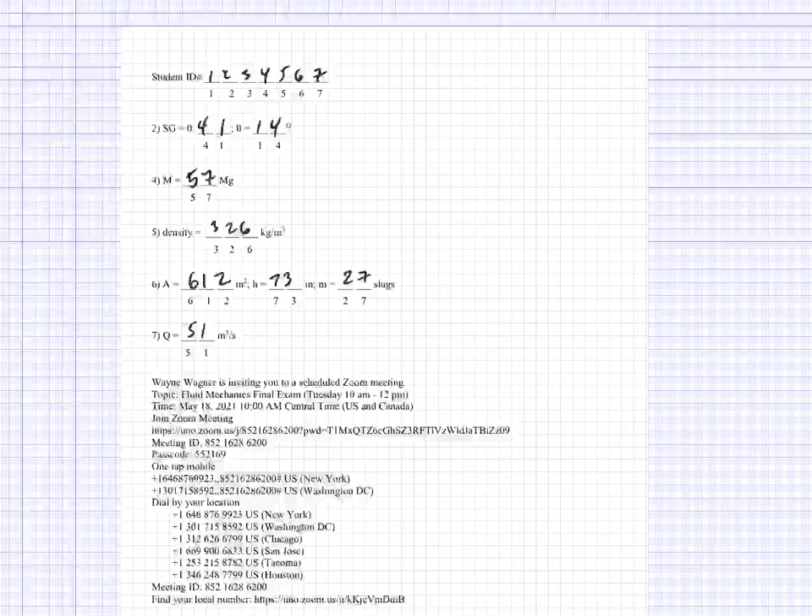All right, so it's been a little while since I worked this exam, since this is now basically summer of 2021. But I'm working this older one, hopefully to help you guys out. This is the final from fall or spring or something. Let's see, when is this? Spring 2021, anyway, was when we took this. Although I think down here it says fall 2020. It looks like I goofed and forgot to write that on there.

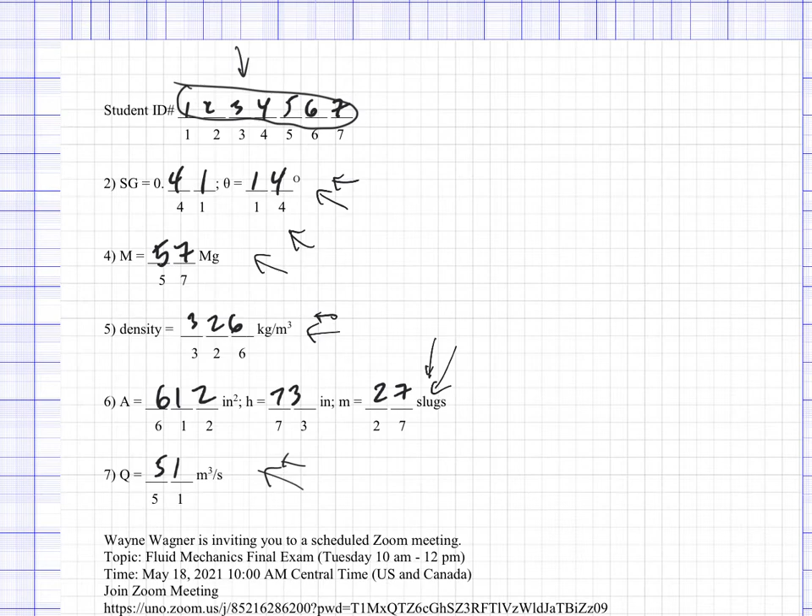Okay, and this first page you can basically ignore. This was just so that everybody could write in their student number right here, and they would get different numbers for each of these questions. It was to prevent cheating. So what I've done here is I've just entered in the student ID number 1, 2, 3, 4, 5, 6, 7, and I'm just going to enter all these numbers in the blanks in each problem. This didn't really stop cheating, but hopefully it made it a little more difficult. So I've already taken all these numbers and written them on the problems, and so when we get there, we will have numbers.

All right, so let's go down here. Here's the first page. Indicate whether the following statements are best described as true or false. Number 1, turbulent flow is more chaotic than laminar flow. That's true. That's almost like the definition of turbulent flow. Number 2, or B or whatever, EGL never decreases in the direction of the fluid flow. This is very false. It's pretty much always decreasing in the direction of the fluid flow. The only time it would increase is if there's a pump.

Okay. Fluid exiting the system into the atmosphere experiences zero gauge pressure at that point. That is true because zero gauge pressure is atmospheric pressure. So that's a good one. Okay. In the English system of units, power is measured in foot-pounds. Okay, that's actually work. But the way you can do this if you forgot is you can look at your sheet where they've got an equation for power, and it's gamma HP or HT, depending on if it's a pump or a turbine, times Q.

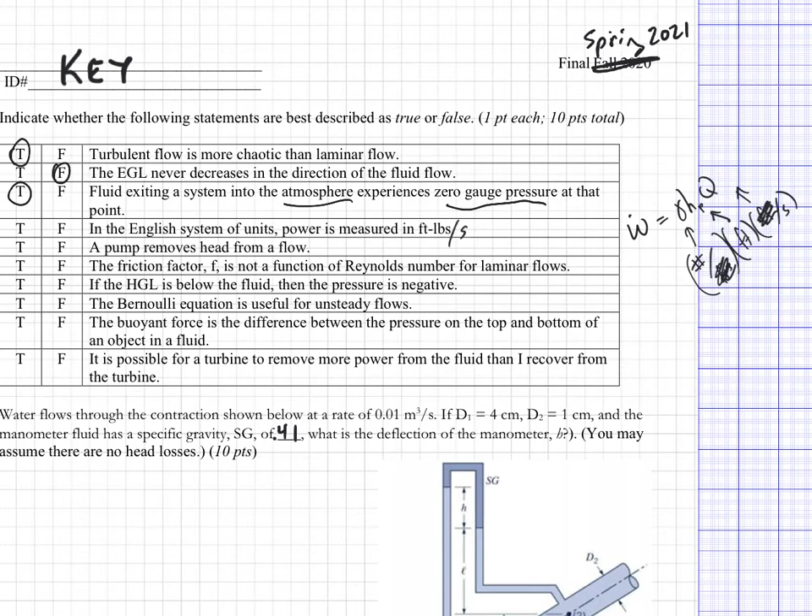And you can say, well, what is gamma? Well, gamma is pounds per foot cubed. The HP, the head from the pump, well, that's just feet. And then Q is cubic feet per second, right? So then you can say, oh, these cubic feet cancel with those cubic feet, and I'm left with foot-pounds per second. So this would be true if that was foot-pounds per second, but it doesn't have that, so it's false. Okay, a pump removes head from a flow. Well, that's exactly the opposite of what it does.

The friction factor F is not a function of Reynolds number for laminar flows. Remember for laminar flow, there's an equation, F for laminar flows, that's 64 over RE. So that very specifically says that friction factor for laminar flows is a function of the Reynolds number. So this is definitely false.

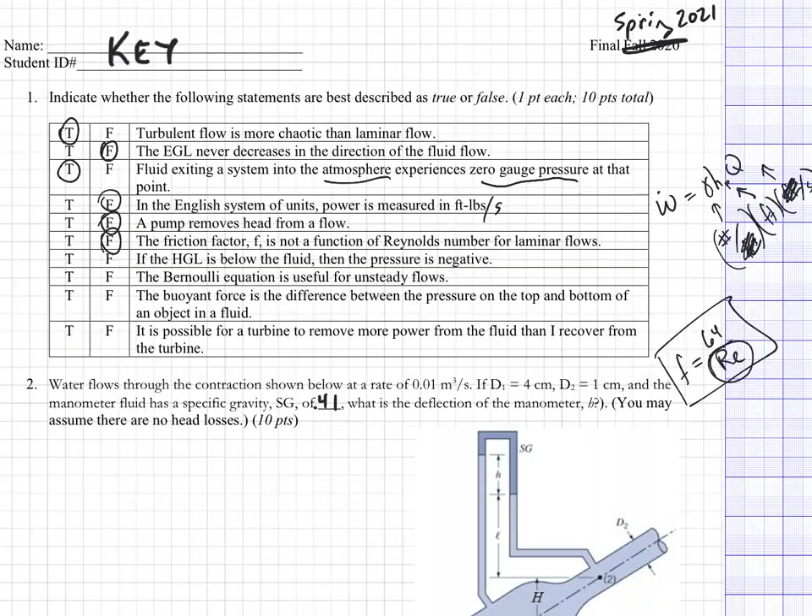Okay, if the HGL is below the fluid, then the pressure is negative. Now this is a little bit complicated, but it is true. Let's say I had a pipe, and I've got an HGL and it's dropping and it drops below the fluid itself. Okay, so this is the HGL. Remember usually you would say, okay, well, here's some datum. And then from here to the fluid itself, that's Z, and then from there up to there, that's P on gamma.

And so Z, P on gamma, and then all of a sudden here, Z, and then P on gamma comes back down. So that is the equivalent of a negative P on gamma, which means we have a negative pressure, in terms of gauge anyway. So if the HGL is below the fluid, then the pressure is negative. This is true, in terms of gauge. So that's definitely a true. This probably could have been a little clearer, I guess.

The Bernoulli equation is useful for unsteady flows. This is false. One of the assumptions of the Bernoulli equation is that it is steady. So that's just something you have to know. The buoyant force is the difference between the pressure on the top and bottom of an object in a fluid. That is true. That is really the definition of the buoyant force.

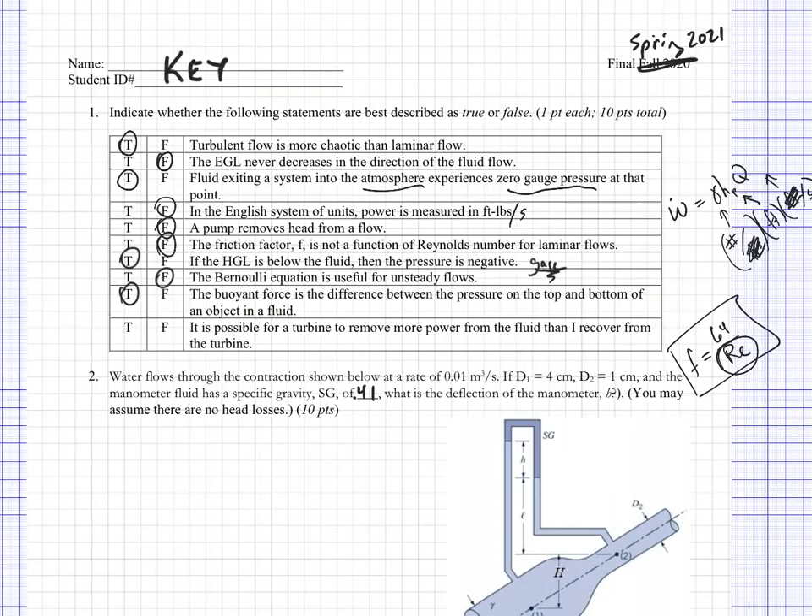And the last one: it is possible for a turbine to remove more power from the fluid than I recover from the turbine. Okay, so let's imagine what this is. So I've got a fluid, it's cruising along, I put in a turbine. Right, so if I remove, say, 100 kilowatts from the fluid. So the fluid here has 1,000 kilowatts, and then right here it's got 900 kilowatts because the turbine removed 100.

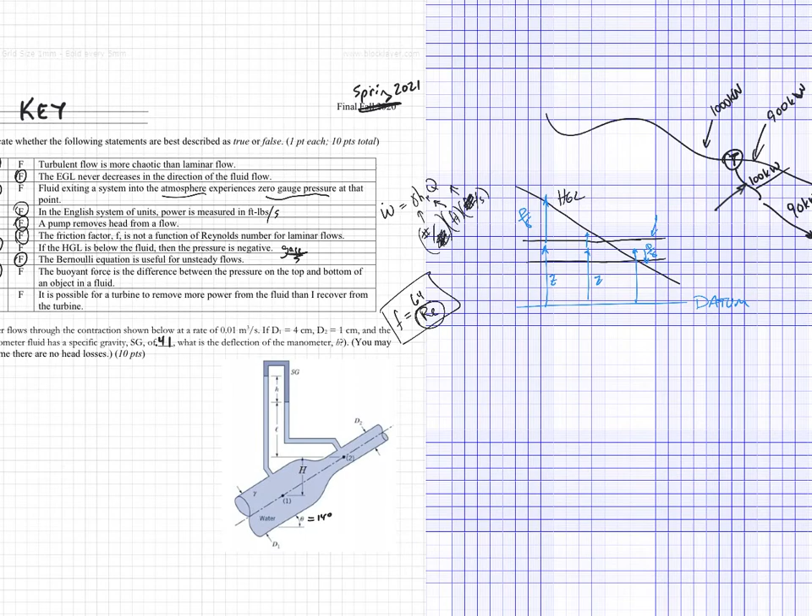Well, how many of those do I actually get? Well, I'm going to lose some because of just efficiency, right? The turbine's not 100% efficient, so I maybe only get 90 kilowatts. Okay, so let's see here. It is possible for the turbine to remove more power from the fluid than I recover from the turbine. Okay, so that is definitely true. That is the way the world works. Laws of thermodynamics.

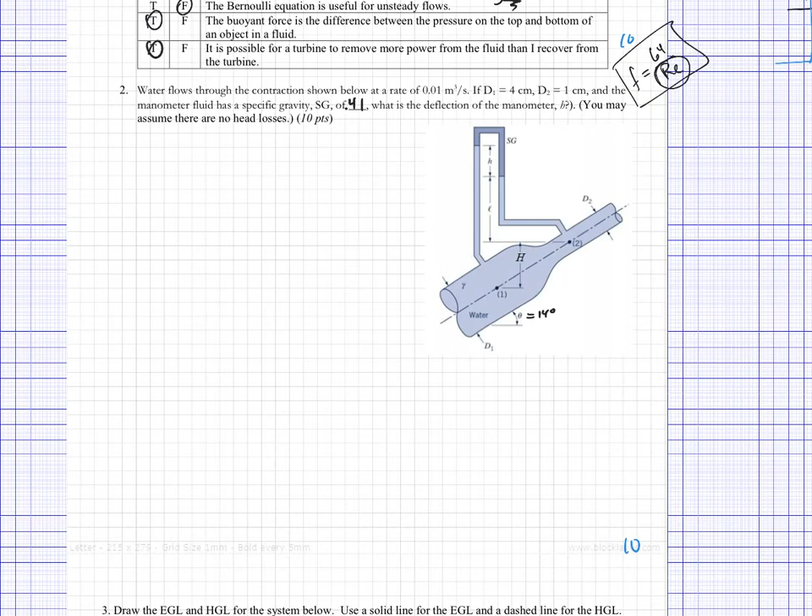Anyway, so that problem's worth 10. Obviously, that math there is easy. Well, almost all of them are worth 10 points. I like easy math. Okay, let's see. So number 2, we have one of these. You guys know me. You know that this is my favorite type because it basically brings in everything.

Okay, water flows through the contraction shown at Q of this number. If D1 is 4 and D2 is 1, and the manometer fluid has a specific gravity of 0.41. Okay, so that depended on the student's student number, so everybody would have had a different number right there. So we'll go with 0.41. What is the deflection of the manometer, h? Okay, so this right here is what we're looking for. You may assume there's no head losses.

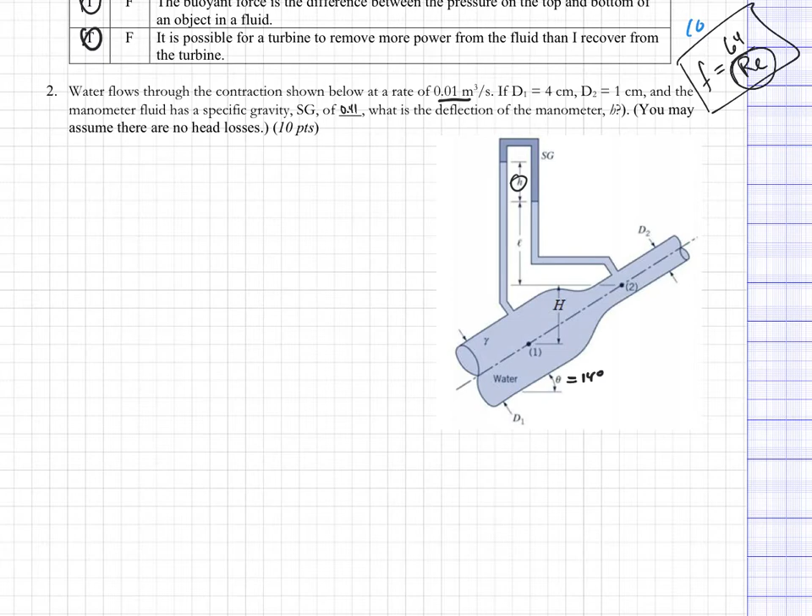So when we assume there's no head losses and there's no pumps or turbines, basically they're saying you can use Bernoulli. The only problem with that, I guess, is that you might be concerned about not having that alpha, which could come into play. But not really, because we're on a streamline. It is steady, so it meets all the criteria of Bernoulli. So we're just going to go from 1 to 2 on Bernoulli. Okay, so here's Bernoulli, and Bernoulli, usually in these problems, is the master equation. So I'm going to put it up here as the master, fully aware that we're usually going to do the same things over and over again for these.

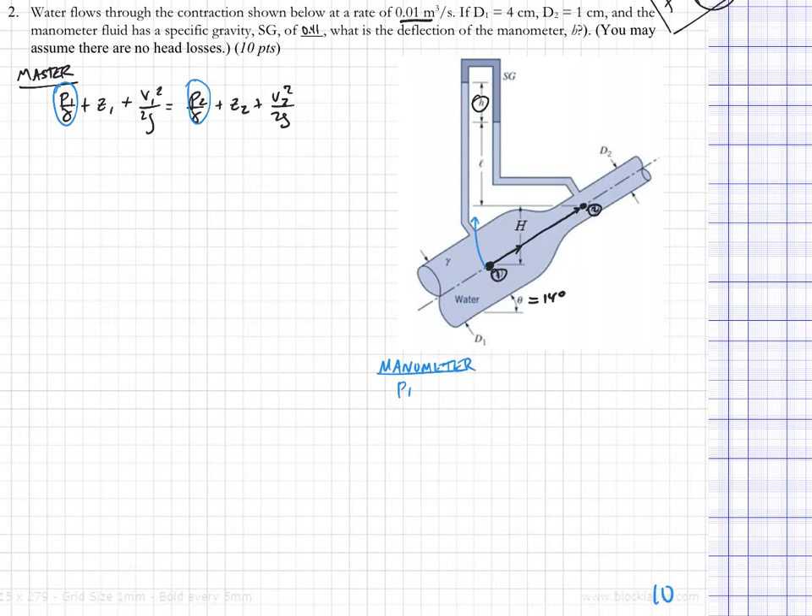So, we've got a manometer. So here's point 1, and here's point 2. And we've got a manometer, and so we're gonna walk from point 1 to point 2. Okay, so I'll start at pressure at 1. So this is the manometer. And why am I doing that? Because I got to get at these pressures, right? So that's the first step. Okay, so P1. I'm gonna go up, so go minus gamma of whatever this thing is that's flowing through here. What is flowing through here? Water. Okay. Gamma water times capital H.

And then I'm going to keep going up, plus L. And then I'm going to keep going up plus lowercase h. Right? And then from here I'm going to move laterally in that fluid, so I'm not going to worry about that. And then I'm going to move down in whatever this is. So I'm going to go plus gamma of the manometer fluid, gamma fluid, times that distance, which is lowercase h. And then I'm going to go down in water, that L, minus gamma water times this L. And that's going to get me over to this point right here, equals P2.

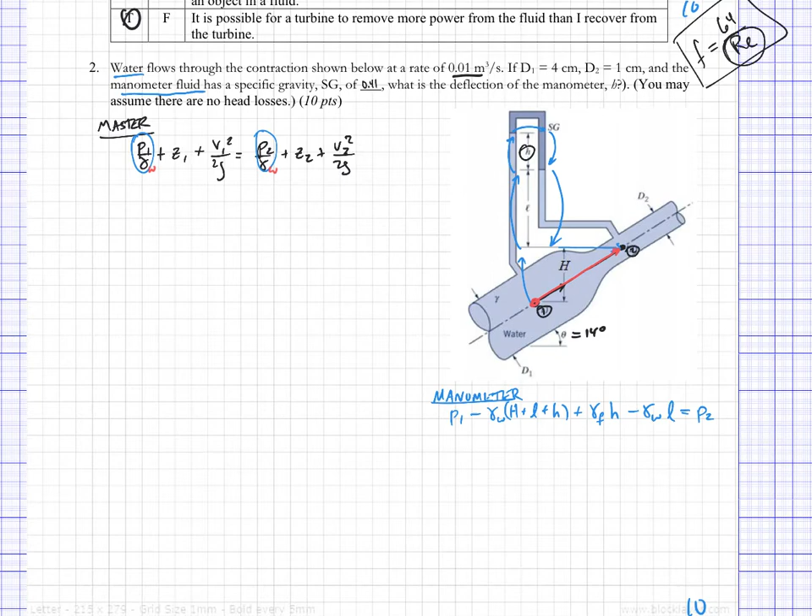Okay, so once we've done that, the manometer equation, we're going to have to rearrange this, right? And in this equation, we always want to be careful and remember that this is gamma water, and that's gamma water, because water is the fluid that is flowing from 1 to 2 in the Bernoulli equation. So we need to remember that when I rearrange this by subtracting P1 from both sides, I want to then divide it by the gamma of water and not by the gamma of this other fluid.

So let's see here. All right, so we're going to divide by the gamma of water. Gamma water, gamma water, gamma water, gamma water. As I do that division, these two gamma waters are going to cancel. These two gamma waters are going to cancel. I've got a minus L right here, because remember that it's going to have that negative sign on it.

Wait a second. Oh, there's an error here, isn't there? This last bit should have been a plus gamma, shouldn't it? So that should be a plus sign. Okay, but anyway, so I've got a minus L right here and I've got a plus L right here. So those two are going to cancel.

So what I'm left with here is, if you do all the algebra, negative h minus h plus gamma f h over gamma water. And in place of that gamma f, I'm going to put SF gamma water, because gamma f equals SF gamma water from the definition of the specific gravity. This L went away with that L, so these two L's cancel. Equals P2 minus P1 over gamma water. And then these two are going to cancel out.

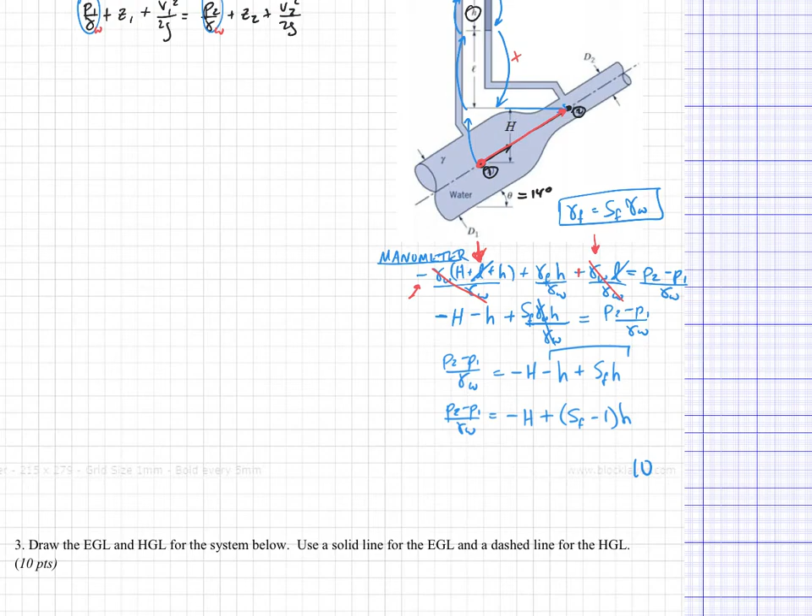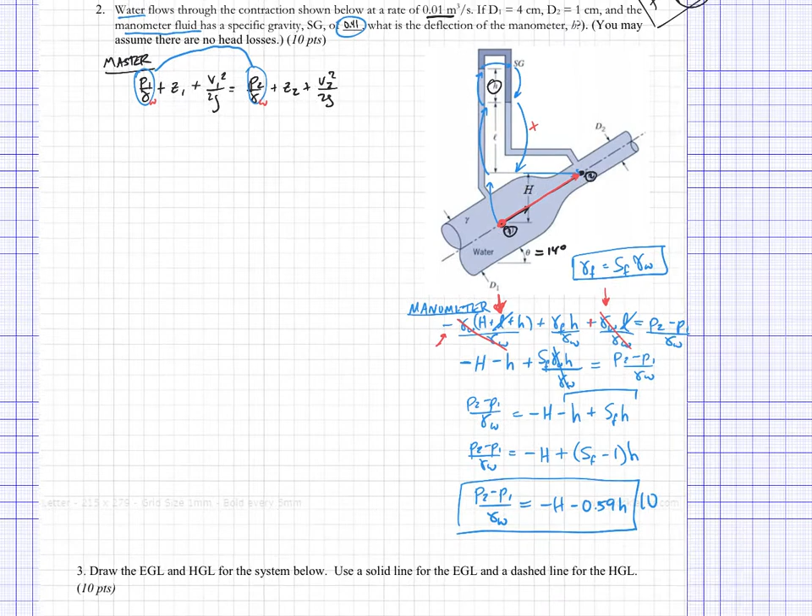The last thing we would do is this specific gravity is 0.41, so we would plug that in, just because it makes it easier. You don't have to do it at this point. Negative H plus, so 0.41 minus 1 is going to be minus 0.59 lowercase h. So once we have that, now I know P2 and P1, or at least how they compare to each other. Of course, it introduces two unknowns, this capital H and this lowercase h. So we'll have to deal with that shortly.

Okay, so now let's go on to the z's. We've got these two right here. We're going to look at our diagram and note that Z1 is right here, and Z2 is right here. So the difference between them is H. So if I make this the datum, then Z2 is at a height of z equals H. So Z2 becomes capital H, and Z1 is the datum.

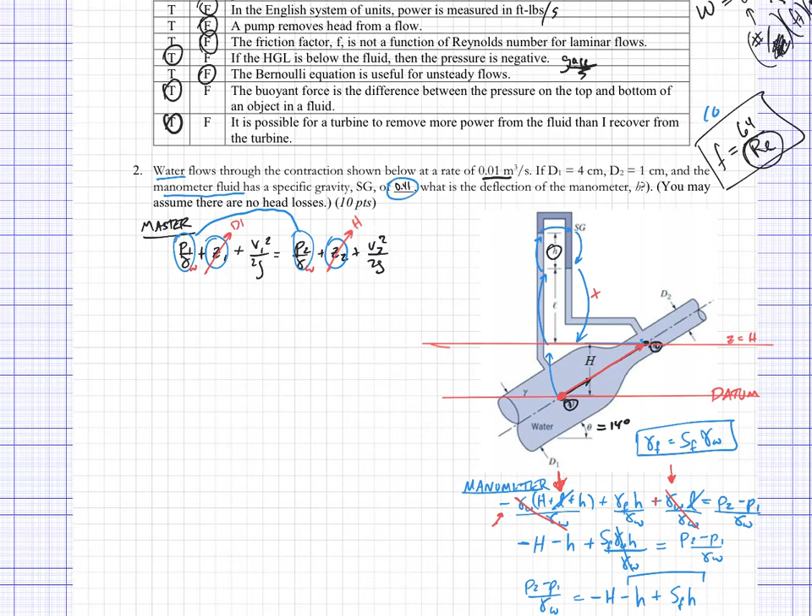Then the last bit, we've got to get at V1 and V2. Usually the way we get at those, and this isn't going to be any different, is we're going to use continuity. Maybe I'm going to do that over here, because we've got D1 and D2. So from continuity, Q at 1 equals Q at 2. So V1A1 equals V2A2. And you should already know that V2 is going to be 16 times V1, but we'll go ahead and work that out.

So V1 times pi D1 squared over 4 equals V2 times pi D2 squared over 4. These pi's and 4's are going to go away. And I'm going to say that V2 equals V1 times D1 squared over D2 squared.

D1 squared over D2 squared times V1. That's just some algebraic manipulation. If you plug in 4 and square it, and plug in 1 and square it, you're going to get a ratio of 16. So V2 equals 16 V1.

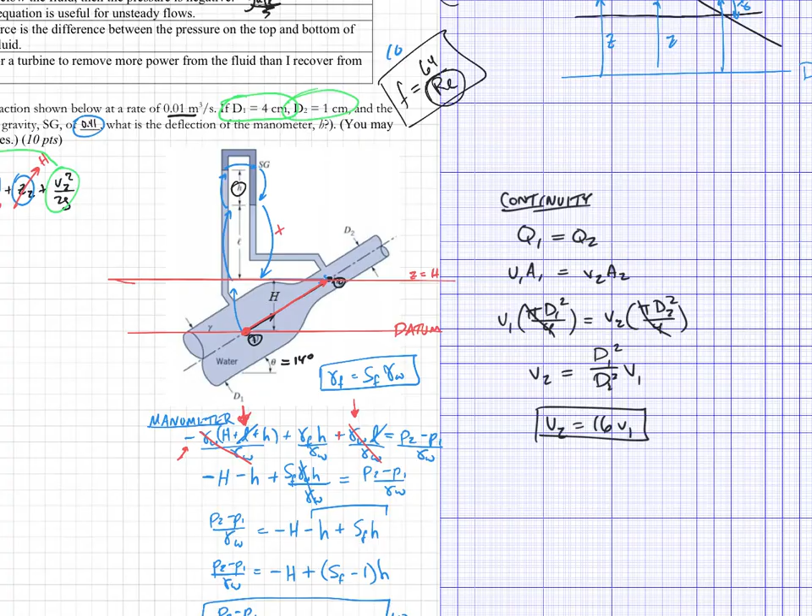Which really means for the Bernoulli or energy equation, whichever one you choose to use, V1 doesn't really matter. That's just the way it is. But we're going to go over here and make use of that knowledge in this equation.

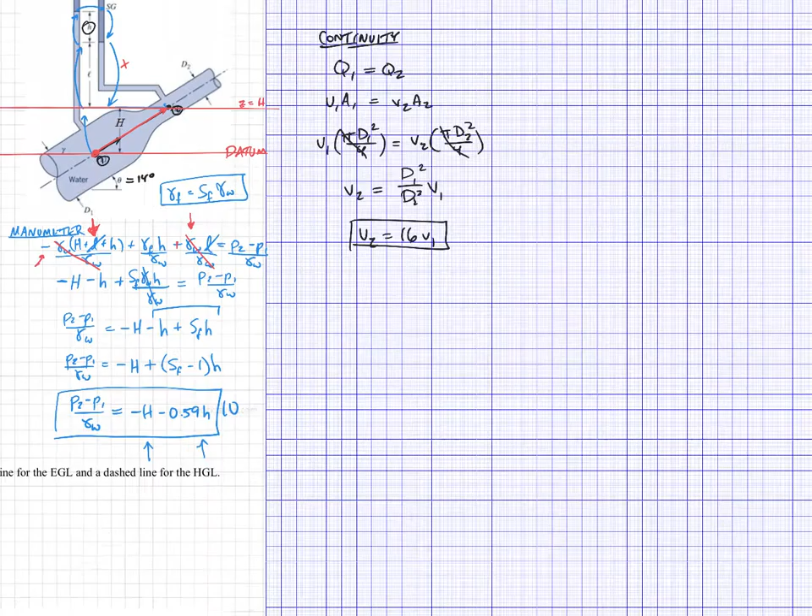Okay, so let's go ahead and plug all of this in and see what happens. Wait, actually, I really screwed that up, didn't I? We've got a flow rate, we've got Q. So that's messed up. Let's go ahead and do this one more time. Since I know Q is...

0.01 cubic meters per second, so I could say Q equals V1A1. So 0.01 meters cubed per second equals V1 times pi times D1 squared—D1 was 4 centimeters, 0.04 meters squared, divided by 4. So V1 is pretty high, really.

7.9577 meters per second, awfully high, right? And if we multiply that by 16 using this relationship, V2 is 127.32 meters per second. So you can see this one's 16 times as big. When we square these, because they plug into the Bernoulli equation, this one's going to be 16 squared times as big. I think it was 16 squared, 256.

I think that's right. So you can see this one basically just doesn't matter. We could ignore it in the whole equation and it would make no difference. But whatever, okay. So we're going to go back over here, and now we have everything we need to plug into this equation. So the first thing I want to do is rearrange it a little bit.

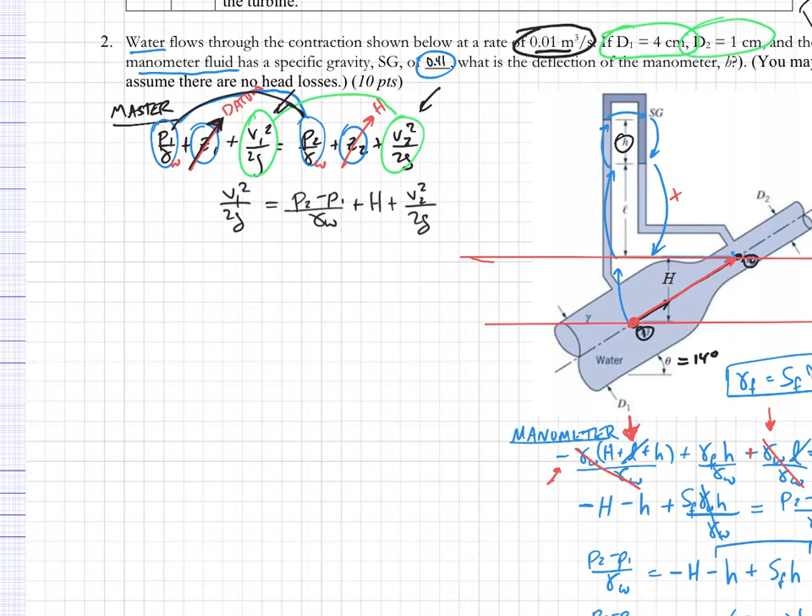From that, I think we are like 100% ready to plug in. So let's do, let's see, V1 was this number, 7.9577 meters per second squared divided by 2 times 9.81 meters per second squared equals P2 minus P1, which is this number right here. Ignore this—that's the number of points on this question.

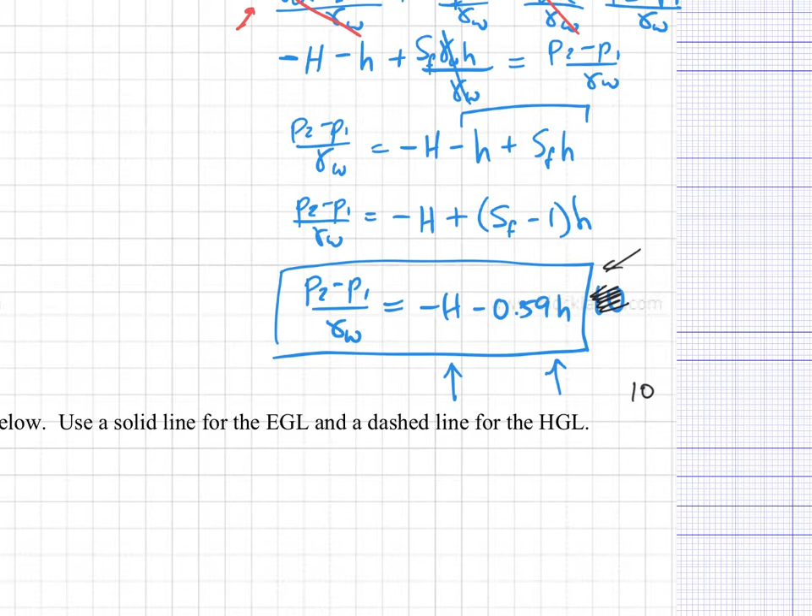Negative H minus 0.59H. So negative H minus 0.59 lowercase h. H is just a capital H. Notice these two cancel—that always happens. It's a really nice feature of these things.

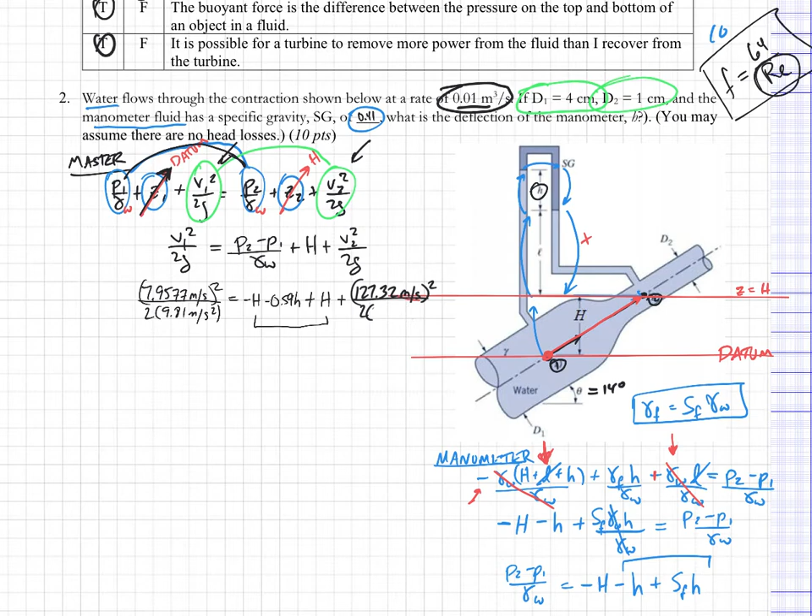And then we'll go plus, and we've got V2, and V2 is some big number, 127.32 meters per second squared over 2 times... 32.2 feet—no, 9.81, excuse me. I wish I could say I did that on purpose to show you that everybody makes those mistakes, but I didn't. All right, so then we just have to solve this for H, right?

I'm going to go ahead and put in the intermediate steps here. So these H's are going to cancel, just because it's going to help me make sure I don't make an error. So negative 0.59H plus, and I've got a number on each side of this thing. And here you can see kind of what I was driving at a second ago—this velocity head is 256 times as big as this velocity head. So when you start squaring things, it starts to really become nonlinear. A lot of times this is what happens.

So now we'll bring this over to the other side, and then we'll divide by negative 0.59, and we'll get some number—that will be our answer. Okay, so I'm getting 1,394.9 meters, or H equals 1.39 kilometers.

Now you may be saying to yourself, wait a second, that's totally unreasonable, therefore I should throw this problem away, blah blah blah. This is one of the problems of this exam—by giving everybody a different specific gravity here, it creates huge problems, or by giving them their own numbers. And so for a lot of this test, the answers just aren't going to make any reasonable sense. This is, in fact, the correct answer.

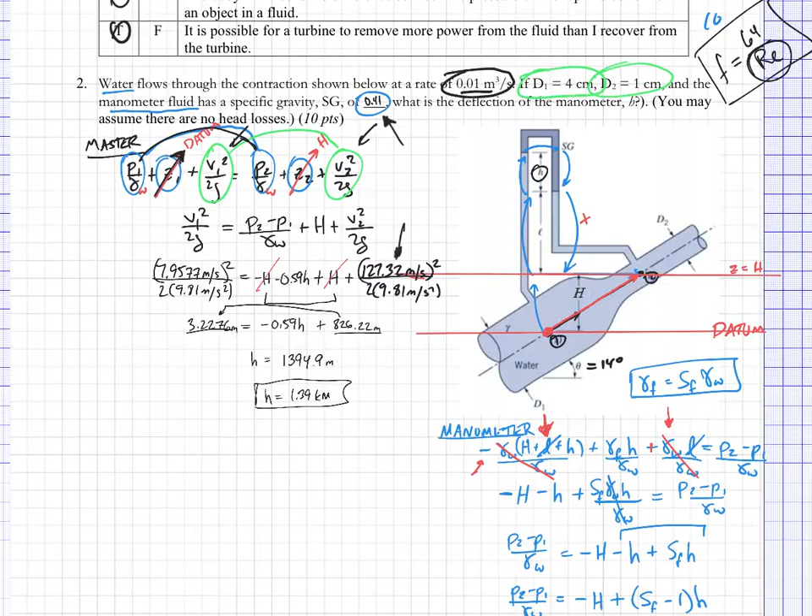Okay, so hopefully that's okay with you guys, but that's how we would work this problem. One last thing to note: this 14 degrees right here is a red herring. It was not necessary to know that. It's not important, the fluid doesn't care about the angle.

Okay, draw the EGL and HGL for the system below. Use a solid line for the EGL and a dashed line for the HGL. So let's see, solid line, maybe we'll go red for energy. So this will be EGL.

Remember, I like to think about the EGL first. 100%, let's think about the EGL, and let's only think about the EGL. Right along here, we have an elevation, which is coming from some datum, Z. My pressure head is 0, my velocity head is 0, right?

I get to this point, and here's where I'm going to lose energy. I'm going to lose energy here, here, here, and with the turbine. I wouldn't worry so much about the nozzle - I mean, technically you will lose energy in the nozzle, so let's just say you're going to lose energy in the nozzle.

You will gain energy in the pump, right? So this is a plus. All those other ones are minuses, right? And everywhere else we're going to lose energy, and we're going to lose energy at varying rates, right?

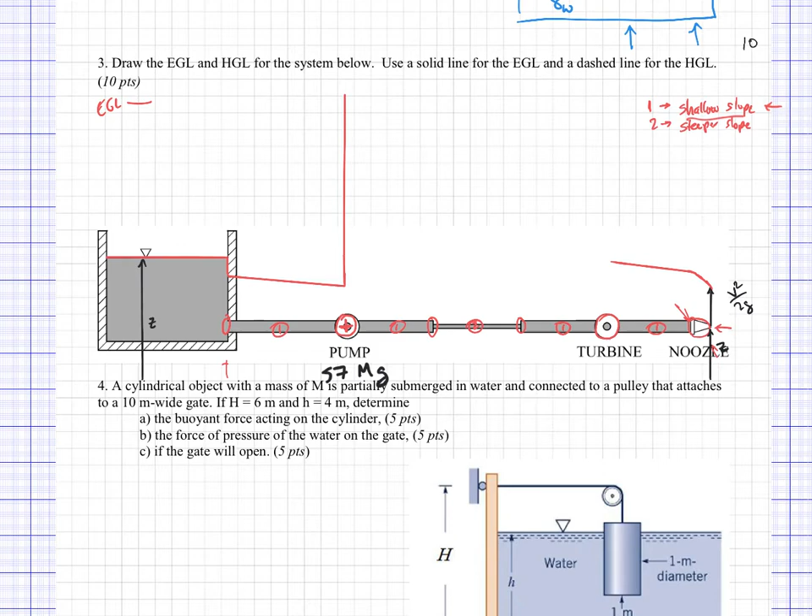Remember, I hit the turbine, I'm going to lose some energy, something significant. I don't know how much. Obviously, this is totally qualitative, so it could be a little tiny drop. I just need to see that there's a drop. And then we're coming out the other side. We're still in a kind of...

D1 pipe, a diameter of 1. So we're going to come back. We're going to hit this little knob or whatever here. I guess I should somehow demonstrate that I'm at these locations, so it never hurts, stuff like that.

Okay, now in here, it's that narrow pipe, so we're going to lose energy. Oh, okay, sorry, first I need a little head loss right there. So I want to kind of get the steepness here, right, and so we're going to go fairly steep in here.

And it looks like I'm going to end up working well into the space for the other problem. I apologize for that - this is, of course, why we drew it. So there's a little head loss right here, associated with this transition. And then we're going to have kind of like a little shallow - we're back in a diameter of 1 pipe, right? So there you go.

There's our HGL, or our EGL, right? And I'm going to kind of make these dotted so that it's clear that's not the same line. Okay, so that's our energy grade line.

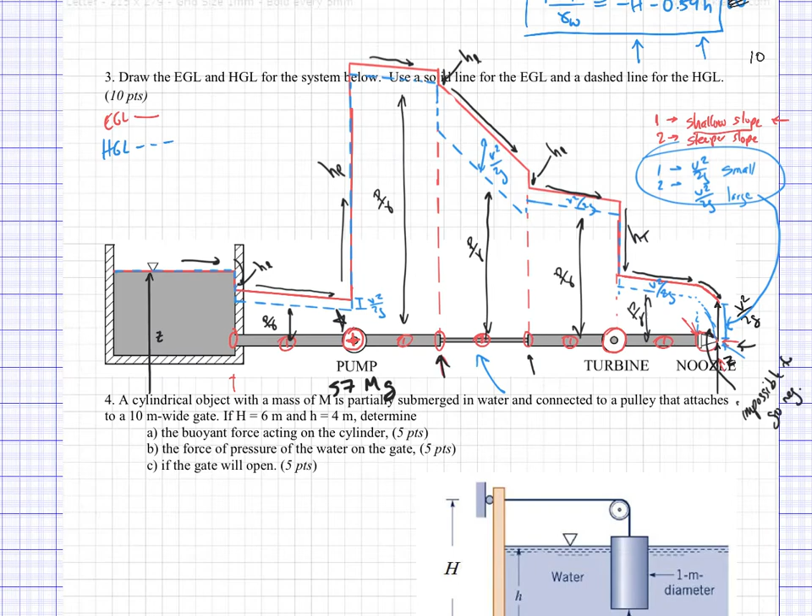I would expect that. I guess if you guys put that it was right here, I guess that's possible. But this is really the only spot in the system where you could expect a negative pressure might happen. And you might draw it that way, right? You might draw a steeper energy loss than I do, right? This is all qualitative, so who knows what would happen, right?

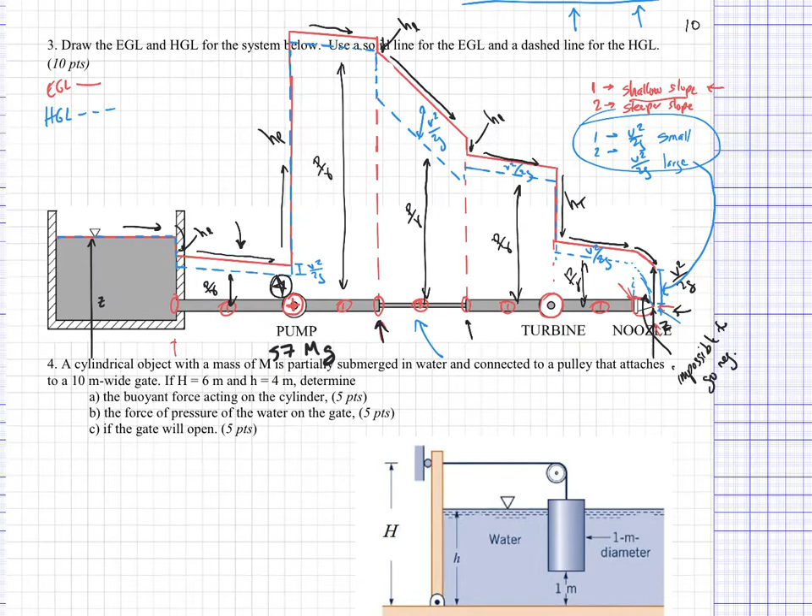So anyway, we're going to move on to the next one. That one's worth 10 points. The way that I grade these is I'm looking for, did you include all these little things like this and this. Not necessarily that you labeled them, but that the pipe went up and down in the places it's supposed to go.

Up and down, and then the slopes of these lines, and then this V squared on 2G. I want you to get those sizes approximately correct. Okay, so that's really the way I grade it.

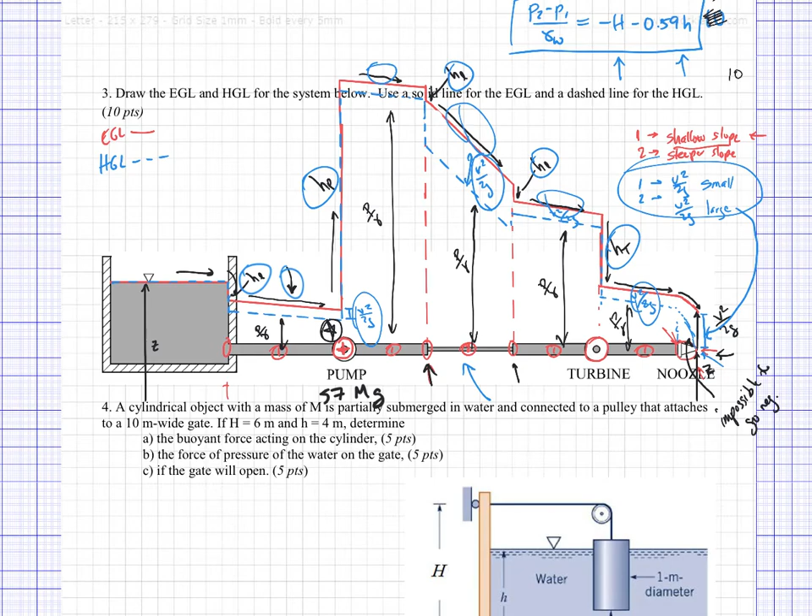If the only thing—what I call a major error—is if you have the EGL go up when there's not a pump, that is what I call a major error, and I'll take off 4 out of the 10 for something like that. Usually if somebody does that, there's going to be a lot more problems than just that, but it kind of means you don't really understand what you're doing with this particular problem. So just be very aware of that.

Okay, so a cylindrical object with a mass of m. So this mass right here is 57 megagrams. Okay, that's a really annoying unit.

So this is coming from somebody's student ID number, and we're going to turn that into a weight. Remember, weight equals mass times gravity. So we've got 57 megagrams, which is 57,000 kilograms, times gravity, which is 9.81 meters per second squared. So that weight equals 559.170 kilonewtons, or newtons, but I converted it into kilonewtons.

A cylindrical object with a mass of m is partially submerged in water and connected to a pulley that attaches to a 10-meter wide gate. If H, capital H, is 6 meters, and lowercase h is 4 meters, determine the buoyant force acting on the cylinder.

So we want the buoyant force acting on the cylinder, the force of pressure of the water on the gate, and whether the gate will open.

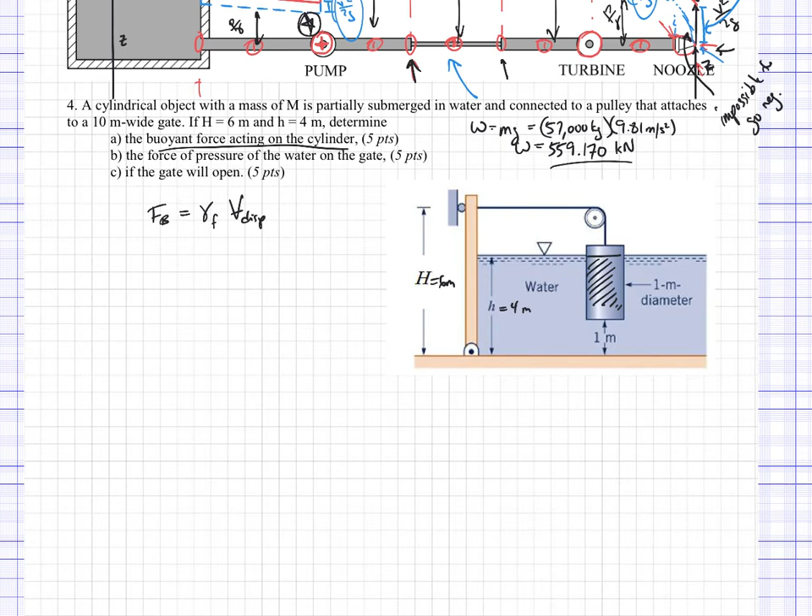I meant to draw those lines all the way down. So that has a height of 3 meters and a diameter of 1 meter. The force of buoyancy equals the gamma of the water times the volume displaced, which is the volume of the cylinder: pi r squared, the area of the bottom, times the depth, which is 3 meters, the height of this cylinder.

So FB equals gamma water—we're in meters, so that's 9810 newtons per meter cubed—times pi times the radius. It's a 1 meter diameter, so that's 0.5 meters squared, times the height, which is 3 meters.

FB equals, this is part A, so we're getting 23,114 newtons. This buoyant force is rather insignificant compared to the weight, since this is a very dense material.

So part B: what's the force of pressure of the water on the gate? We're looking for something totally different now. I'm going to box this so it reminds me not to erase it as I work through this problem. The water is right here, and this is the pressure prism. I need to know the force of pressure on that gate—how do we get that?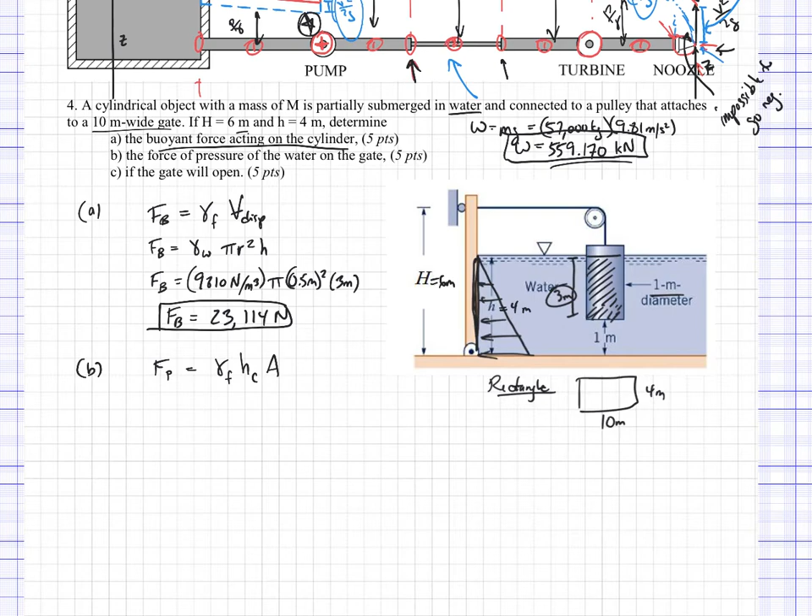I'm going to get all the things for it because the centroid is right here. The HC and the YC are both the same, because the HC goes from the water surface down to the centroid vertically, and the YC follows the surface of the gate down that same distance. Since the gate is vertical, it's the same for both: 2 meters and 2 meters. The area of this gate is 4 times 10.

So that's going to be 40 meters squared. And then the IXC for a rectangle is 1/12 the base, which is 10 meters, times the height, which is 4 meters, cubed. Okay, so that's some number, like 53.333 meters to the fourth. And as I've told you guys a million times before, I hate those units because it doesn't really mean a whole heck of a lot to me.

Okay, so anyway, let's go over here to the FP. Once we've done this, it's really just plug and chug for finding the force of pressure. So the force of pressure equals the gamma of the fluid, 9810 newtons per meter cubed. The HC is 2 meters, and the area is 40 meters squared. So the force of pressure is 784,800 newtons. Now you can see that number can maybe compete. They're of the same order of magnitude, more or less, right?

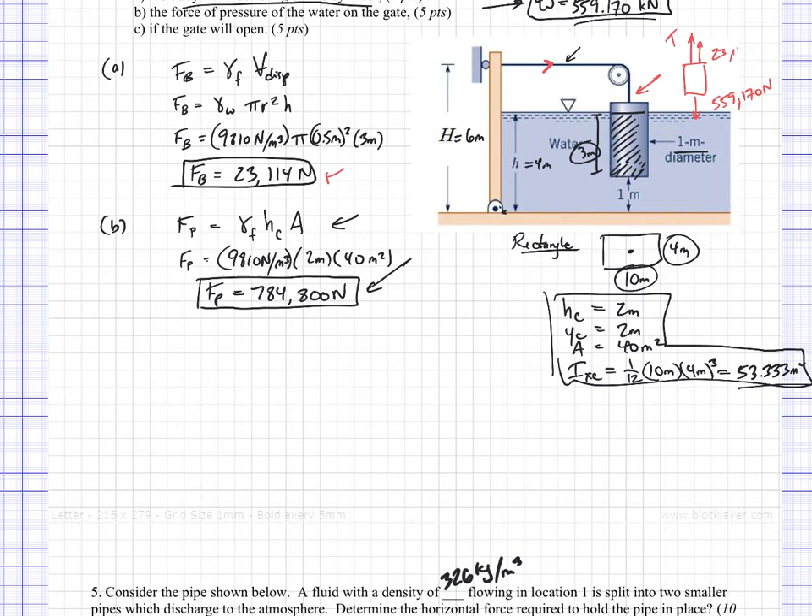If we really wanted to analyze it, we would look at this weight, because the weight has a weight going down of 559,170 newtons, and presumably it's got a tension going this way, and a buoyant force of 23,114 newtons. So if this thing is not moving, which is the assumption we're going to make, because the last thing is if the gate will open, we're going to assume that it's not going to open.

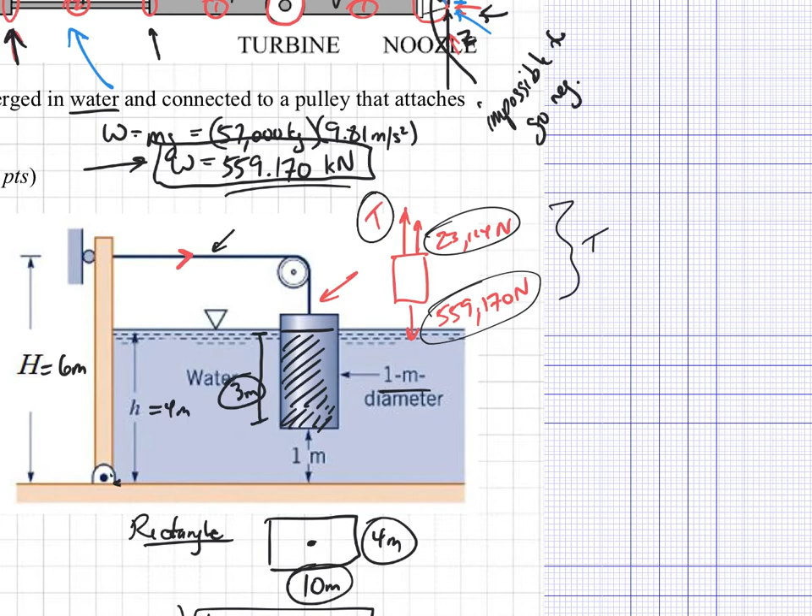Based on this, my free body diagram of that weight: I've got a tension and a buoyant force going up, and the weight of the thing going down. So tension has to be greater than or equal to the difference of those two for this thing to not move. Well, really it's got to be equal to, right? Equals for no motion. So let's do that subtraction real quick: 559,170 minus 23,114.

And we're going to get 536,056 newtons. Right? It sucks working with these big numbers, excuse my French. So 536,056 newtons.

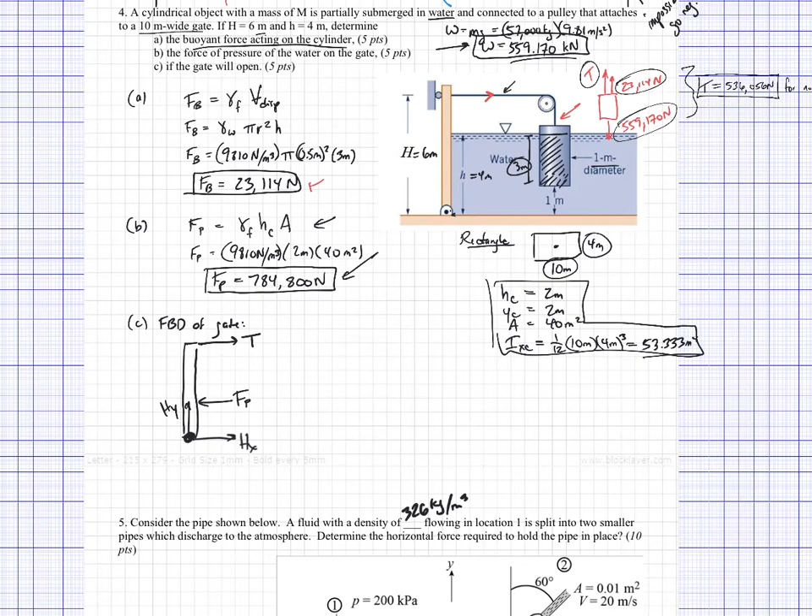So what that means is that I can go down here to C, and for that to be the case, let me draw the free body diagram of the gate. It looks like this, more or less, quick and dirty. Here's a hinge. At the hinge I've got HX and HY, and I've got a tension up here, which we know how big it needs to be, and then the force of the pressure. So to solve this, we're going to say the sum of the moments around H equals 0.

So I've got FP times this moment arm, which I don't know yet. We'll call that Y, times Y. That's causing it to spin this way, so that's positive, minus the tension times its moment arm, which is this whole distance here, which is given as 6 meters, equals 0. So that's this capital H. Maybe I'll leave it as capital H for cleanliness, since I don't have any of these other variables plugged in yet.

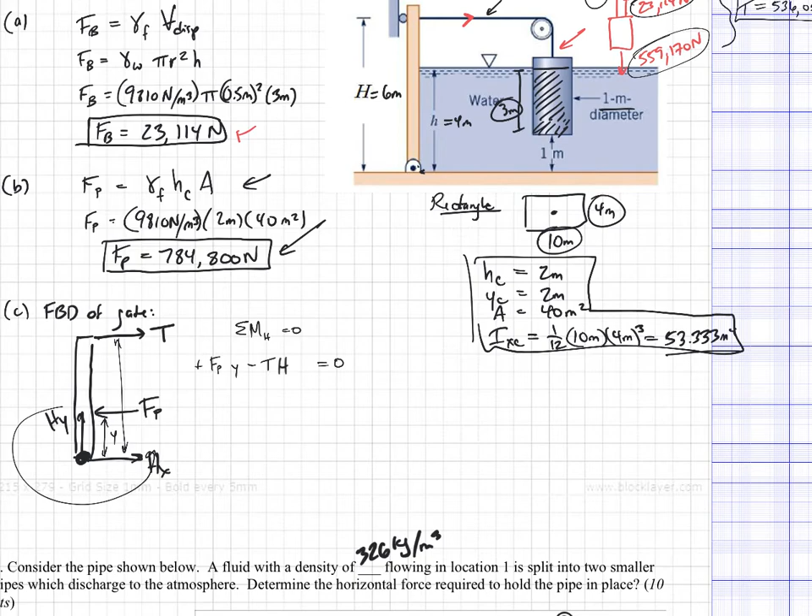So let's see. Come on, baby. You can do it. Okay, here's a capital H. All right, so this little y is what we need right here. We need the distance to that FP, right? So FP is like right here. And the way we get it is we need this distance right here, which is called YCP.

Okay? How do we get YCP? Right? This little distance right here, this is 4 meters minus YCP. Okay? And so that's really what we're looking for, is 4 minus YCP. But to get YCP, we use our equation YC plus IXC, or IXX or whatever, over YC A.

Okay, so YCP equals, let's see, YC is 2 meters plus IXC, which is this number, 53.333 meters to the fourth, divided by YC, which is 2 meters, divided by the area, which is 40 meters. Right, so YCP equals 2 2/3 essentially.

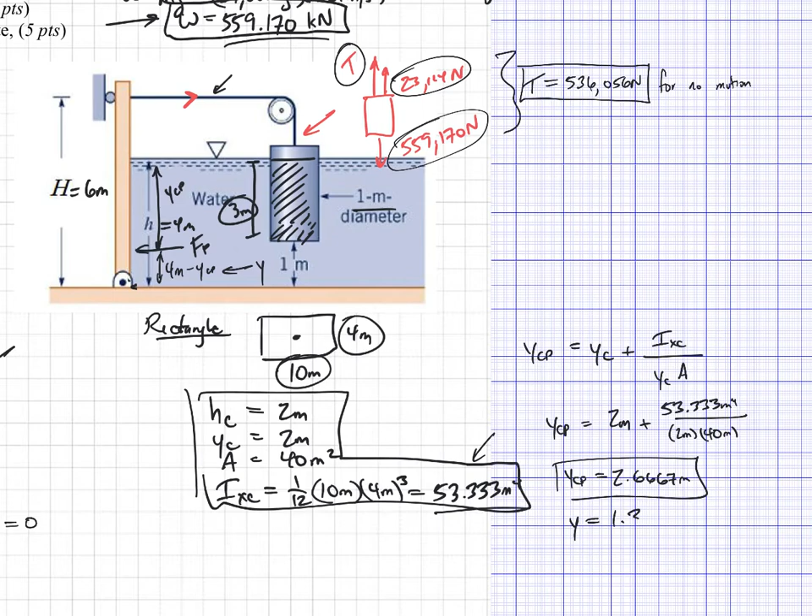Okay, which means this distance we're looking for right here, which I've called Y, Y is going to be 4 minus that, which is 1.3333 meters. Okay, so we'll go back over here, and so this is 1.3333 meters. This is 6 meters. Okay, and so we'll go ahead and plug in.

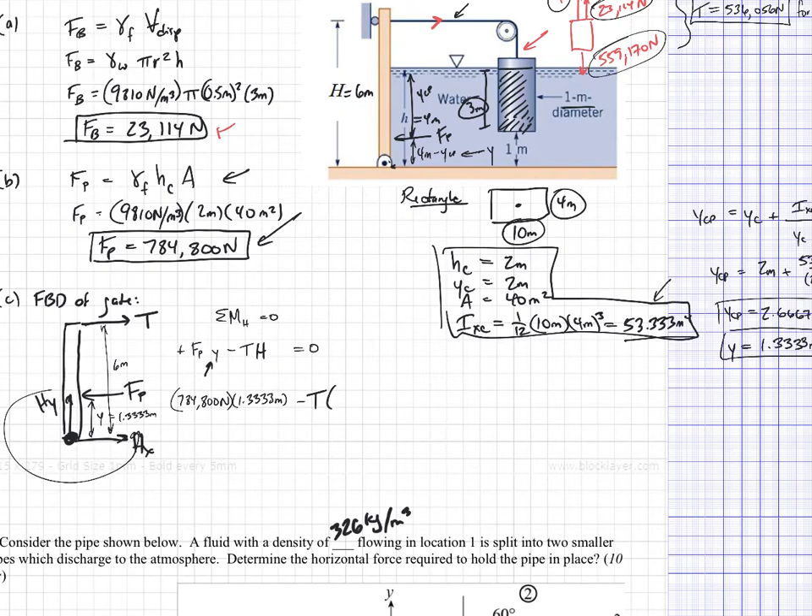So FP is 784,800 newtons times Y. What was Y? Oh, 1.3333 meters, minus the tension in the rope. Let's go ahead and solve for the tension in the rope times H, which is 6 meters, equals 0, right? I have a tension up here, but that's really a critical tension, right?

If the tension is greater than this number, then that means this fluid is going to go that way. I mean, the weight is going to rise. And if the tension is less than that number, then the thing will fall, right? Yeah, anyway. Let's go ahead and get a tension first, and then we'll think about this. So tension equals. Okay, so this is the tension.

This is the tension required to overcome the weight of the water, or the pressure of the water, to overcome FP. Right, so 174 kilonewtons. Okay, it turns out we've got this many kilonewtons, okay, which means the gate will open.

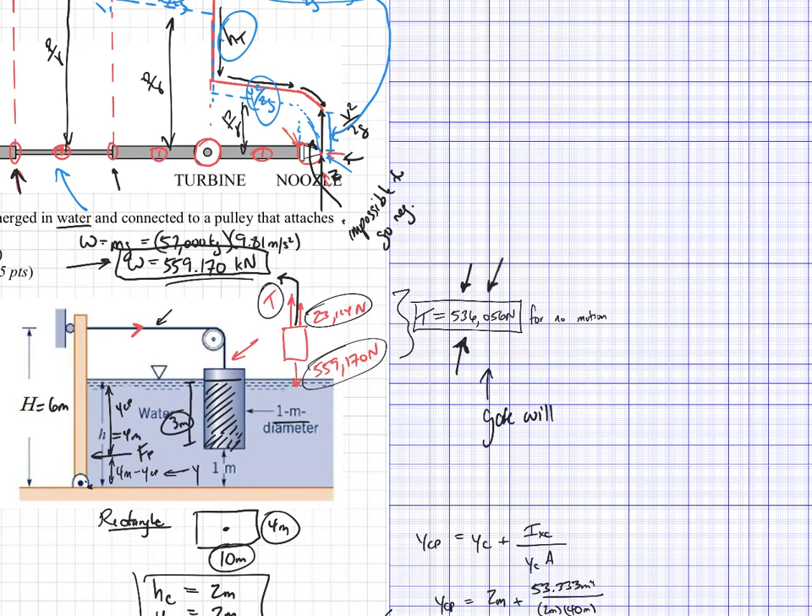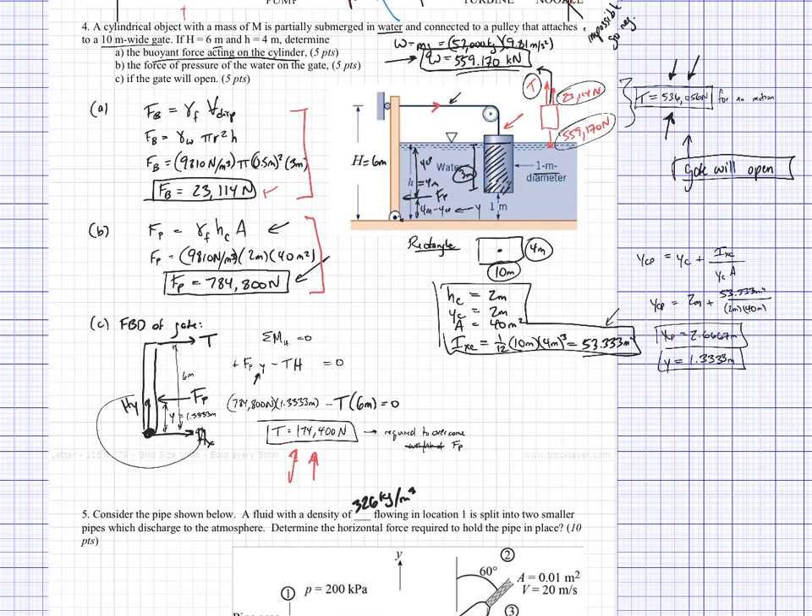Okay, all in all, this is one of the hardest problems I've ever put on a final. I mean, hard is a little bit strong, only because this part was straightforward, this part is straightforward, but this last little bit, just thinking about, well, what is this tension? And what is the actual tension on the rope? So this is the actual tension on the rope at the moment that this thing is this deep in, right?

Because as soon as it starts to move, if it moves in that direction, or if it moves in any direction, the buoyant force will change. But the buoyant force isn't terribly important here, right? Because it's relatively small. So anyway, this C part was a bit of a doozy. It kind of took some slowing down and thinking about it. So just be aware of that.

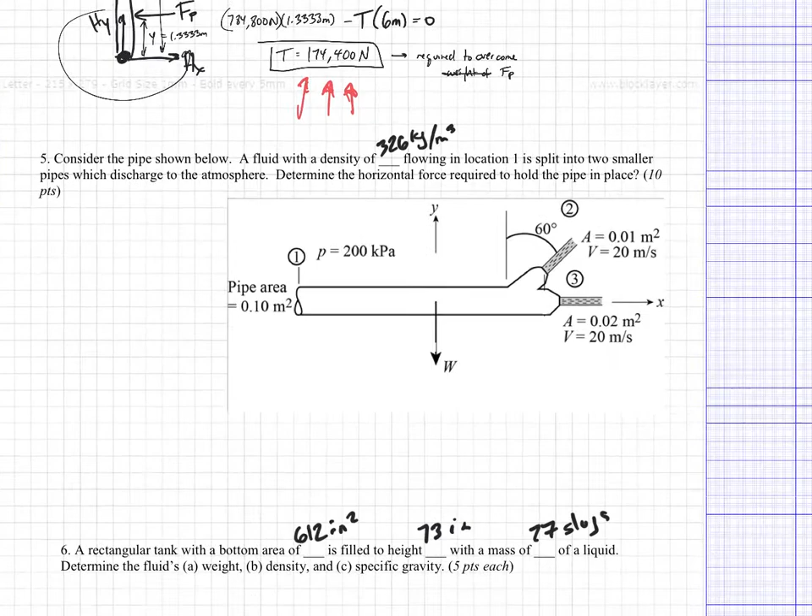All right. Consider the pipe shown below. I love it when they tell you to consider a pipe shown below. Okay, so we've got a fluid with some density flowing in location 1. It's split into 2 smaller pipes which discharge to the atmosphere. Okay, determine the horizontal force required to hold the pipe in place. Okay, so when we approach something like this, let's see, the horizontal force.

So we're doing a force on a moving fluid, which means we're going to be doing the momentum equation. And it only wants horizontal, so we're going to go in the x direction. So sum of F in the x plus the summation of the ins of rho Vx Q equals summation of the outs of rho Vx Q. Okay, notice for the ins, I've got 1 location, and for the outs, I've got 2 locations, right?

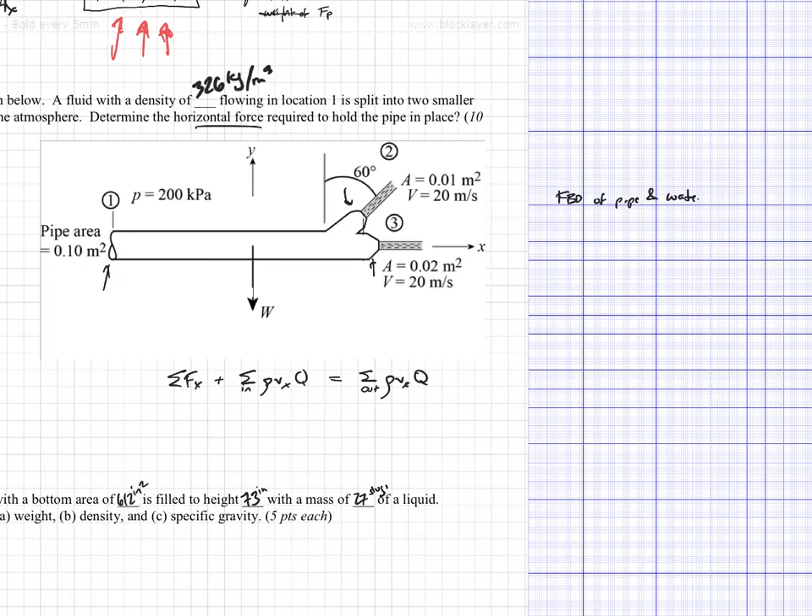So let's consider a little free body diagram over here of the pipe and water. Okay, why do I want the pipe? Because this is a question about holding the pipe in place. Okay, so here's my pipe. This one's closed. Those two are open to the atmosphere.

Okay, so I'm going to go in here and just draw on this, right? So this one's a pipe, so it's got a little pressure right there. So I'll call that P1A1. Okay, it's an enclosed pipe, so it's pressurized, right?

Otherwise, let's see here. I've got the weight of the water. I've got the weight of the pipe. Okay, luckily I don't have to worry about those, right? Those are going down, and this is a question in the X direction. And then I've got a force to anchor it. Force to anchor in the Y or Z direction, which, again, we're not going to worry about that. Force to anchor in the X direction, right?

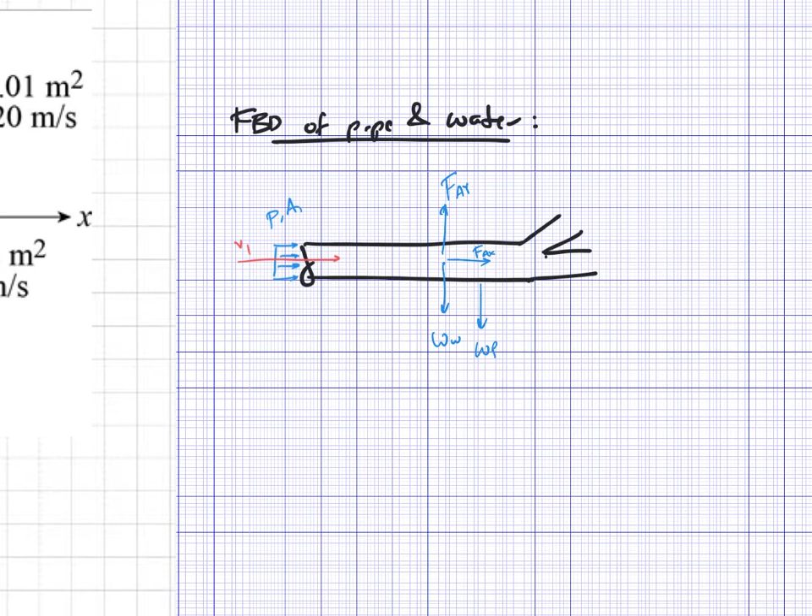Beautiful. All right, so then the only other things we need to deal with is we've got fluxes. So V1, V2, and V3. And remember, there's no pressure at 2 or 3 because it's going out into the atmosphere. Okay, so these are the things that we need to deal with. I'm going to expand this equation down here based on that free body diagram, and that will kind of tell me what it is that we need to solve for.

Okay, so the forces in the X direction. I've got FAX, that's what we're looking for. I've got plus P1A1. Okay, that's in the X direction. Those are all my forces. Okay, I've got an in right here of V1. So I'm going to go plus rho V1, okay, Q1, I guess, equals. Now we've got two outs here.

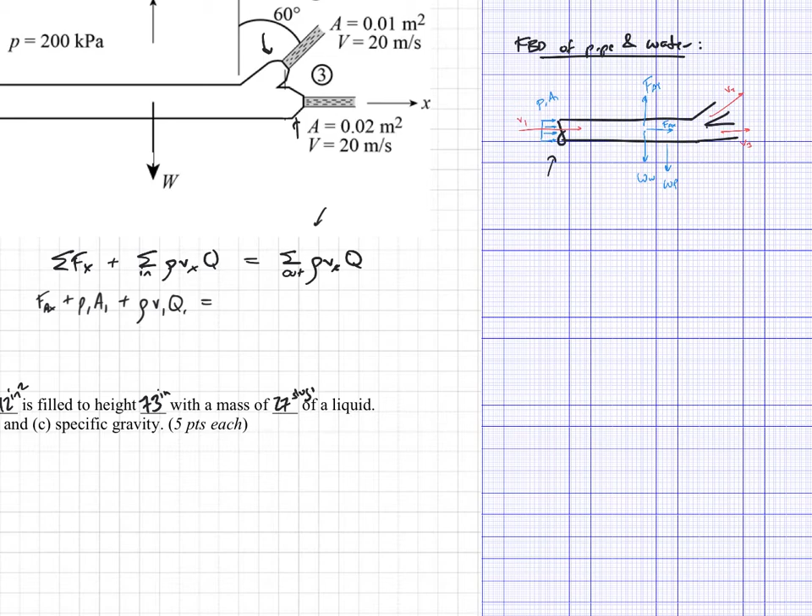So the first one is going to be, now remember we're only dealing with the X direction, so it's going to be rho. We'll call this V2, but we're only dealing with the X direction, so that's going to be the sine of 60 degrees based on this angle right here, because that's the opposite side, times Q2.

Okay, and that's in a positive X direction, so then I'm going to do rho V3, and that one's just in the straight direction, so we don't need an angle on there. We'll call that Q3. Okay. So that's pretty much the whole thing. Now we just need to see what it is that we don't know, right? So once we're here, let's see what we know and what we need, okay?

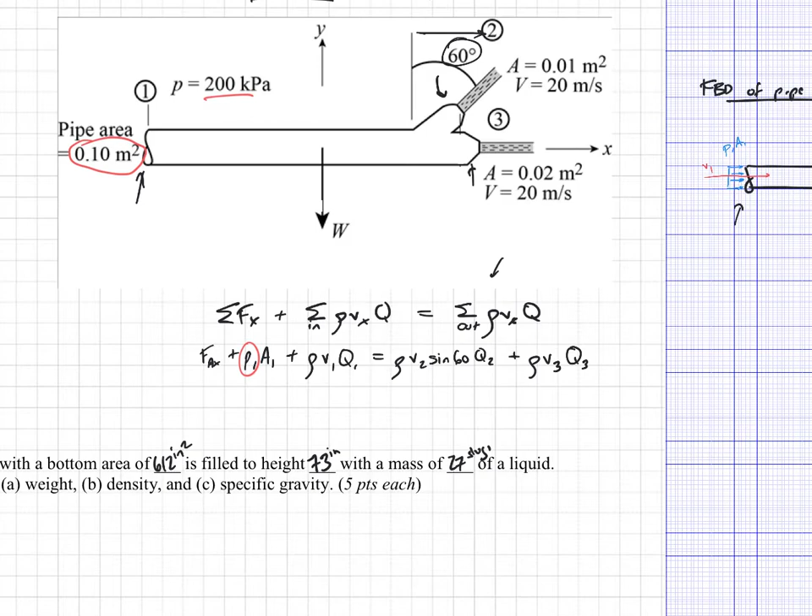So we've got P1 from right here. The area, it actually gave us the area, so we don't even need to do pi d squared over 4. Let's see here, V1. We don't know what V1 is, so V1 is a big question mark. Okay, did it give us Q1? I don't think it gave us Q1 either, so that's a question mark. That's problematic. All right, what about V2? Well, they gave us V2 is this, and we don't need A2 yet, not directly anyway, so we know V2.

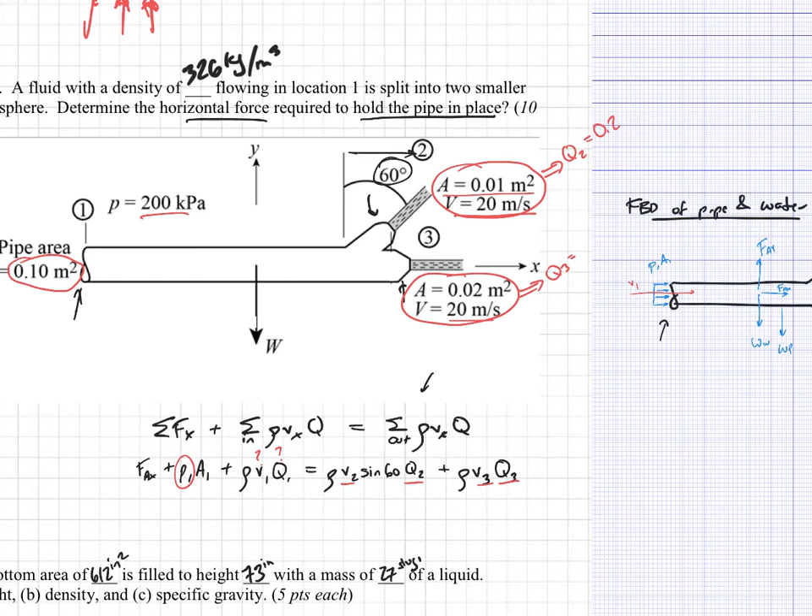And we can get Q2 from multiplying these two, right? And we have V3 given, and we can get Q3 by multiplying these two. Okay, so let's go ahead and get some of those values here, because I think it's going to be helpful. If I multiply V times A, I get Q2, and if I do V times A here, I'm going to get Q3. These numbers are nice and clean. So Q2 is 0.2 meters cubed per second, and Q3 looks like it's 0.4 cubic meters per second. Okay, so those are fairly clean.

You didn't have to do it right here. You could have just plugged them down into these equations. It's kind of up to you. All right. So then, what does that mean? Q1, whatever comes in is going to have to equal what's leaving, right? So if this is leaving and this is leaving, then Q1 is 0.60 meters cubed per second, because it has to be the same as what's leaving.

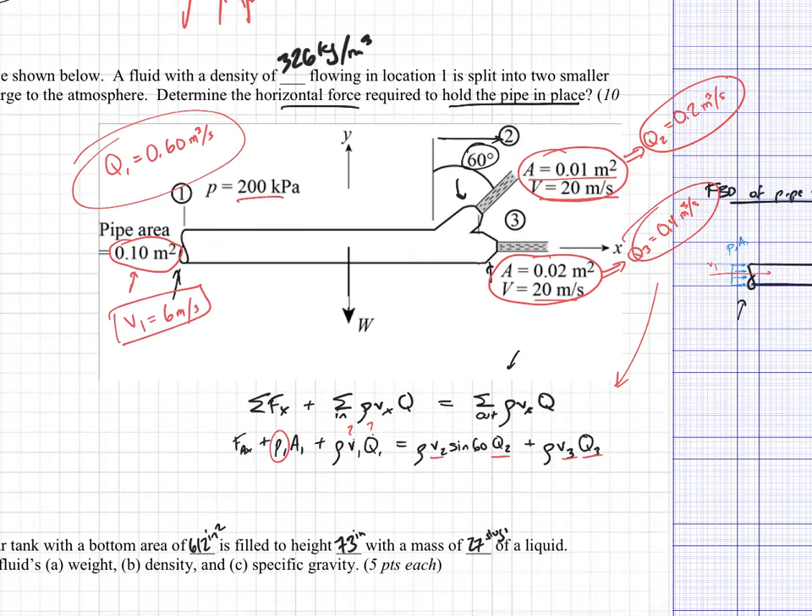And then if I divide that by this area right here, I can get that V1 equals 0.60 divided by 0.1, so it's going to be 6 meters per second. It's really cooking on this end. Okay? And I think that gives us everything we might need for this problem. Let's just start plugging in and we'll find out.

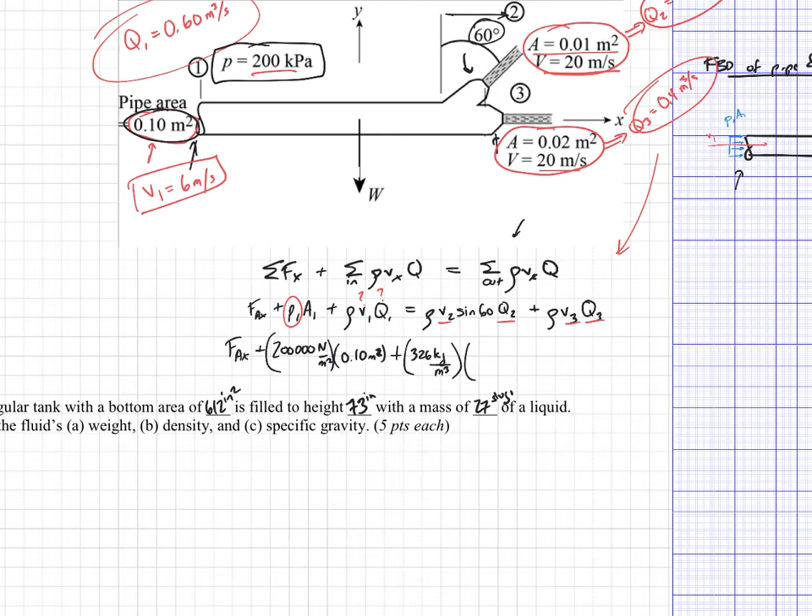Okay, so FAX plus P1, 200 kPa, 200,000 newtons per meter squared. Be careful because pressures are almost always given in kPa, so just convert that into regular Pa. It's going to make your life a lot easier. Times that area, which is this guy right here, so 0.10 meters squared. Plus the rho. What was the rho here? Oh, what an annoying rho, right? 326 kilograms per cubic meter times V1, which is 6 meters per second, times Q1, which is 0.6 meters cubed per second,

equals rho, 326 kilograms per meter cubed, times V2, that's this number right here, 20 meters per second, times the sine of 60 degrees. What's the sine of 60 degrees? Is that root 3 over 2? Yes, it should be.

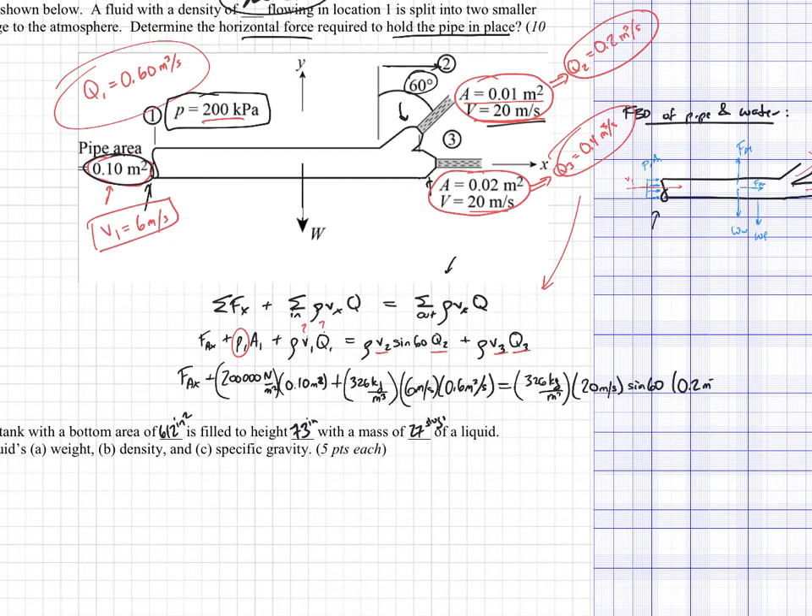Okay, and then we've got a Q2, which is 0.2 cubic meters per second. So that's this term, and now we need to get this one, plus 326 kilograms per cubic meter times V3, which is this number right here, 20 meters per second, times Q3, which is 0.4 cubic meters per second. Boy, when I made this exam, I didn't give a lot of space for this problem.

All right, so I'm going to pause it while I plug and chug this in my calculator. Actually, I can do some of these in my head, right? So this one's 20,000 newtons, right? Newtons plus. Okay, so it comes out kind of like this.

And I think what you'll see here is that this pressure term is really just going to kind of overpower everything else. So we're going to end up with a negative number. So basically, the principal thing that's happening is that the anchoring force is going to be pushing back against this P1A1, right? And there's a smaller effect from these momentum fluxes, but they don't really matter in this case, or at least not too much.

17,436.3 newtons. Okay, so FAX equals 17.4 kilonewtons going that way, right? Okay, so that's how we do that one.

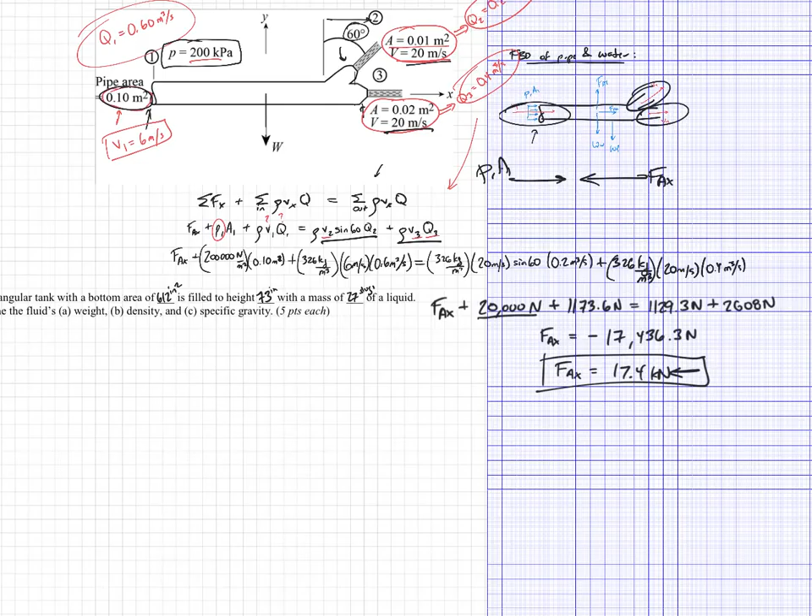All right, so let's see here. Ooh, a rectangular tank. Nice. Okay. All right, so a rectangular tank with the bottom area of 612. So we've got a tank. Okay. Its bottom area is 612 inches squared. It's filled to a height of 73 inches, so it's got some fluid in it. I don't particularly like my drawing, but 73 inches with a mass, so the liquid is 27 slugs.

Determine the fluid's weight, density, and specific gravity. Okay, let's see here. Weight equals, okay, so A. Weight equals mass times gravity, or weight equals gamma times the volume. Well, I don't know the gamma, so we can't use this one, so let's use this one. Okay, so weight equals 27 slugs, times gravity, which is 32.2 feet per second squared. So the weight equals whatever that is. Let's see here, 869.4, and this is going to have units of pounds, right, because a slug foot per second squared is a pound. To give this 3 sig figs, you would say 869 pounds.

Okay, cool. Let's see here, density. Okay, B. Density, okay, so rho equals mass divided by volume. So that's probably the easiest way to get at this. So let's go ahead and do that. So rho equals the mass, which is 27 slugs, divided by the volume, which is the bottom area, 612 inches squared, times the height, which is 73 inches. Okay, so rho equals, this is going to be an annoying number, right? 27 divided by 612 times 73. So it's really small. So 0.000604351. Okay, now this is in units of slugs per inches cubed, and there's no reason why I would not accept that answer. It's a completely miserable answer, but it's certainly acceptable because it's true. Ideally, you would want to multiply this by 12 cubed in order to get slugs per cubic foot. Okay, so in slugs per cubic foot, this is 1.0443 slugs per cubic foot. Okay, so that conversion just makes this a lot nicer to work with.

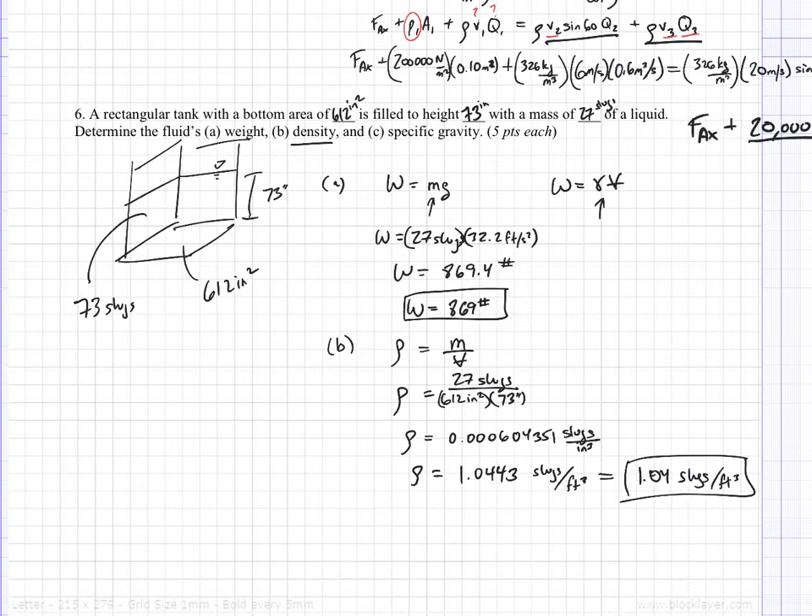Okay, for the answer that you would turn in, of course, you would round to 1.04 slugs per cubic foot. Okay, so the last thing is we want specific gravity. So we want to compare that to the density of water. So C, okay. So S of this fluid equals the rho of the fluid divided by the rho of water, right? So this fluid is 1.0443 slugs per cubic foot. And the density of water is, now remember, if you forgot the density of water, remember you take 62.4 and you divide it by 32.2, okay, and you get 1.94 slugs per cubic foot, right? And so if you divide those, we'll get 0.53889, or really this specific gravity of the fluid is 0.539. Okay, so that's how we do that one.

Okay, so let's go down here. Oh no, we have a Moody problem, which means, well, when we get there, I'm going to have to import a Moody diagram. But for now, let's work this sucker. Determine the power required to pump water at a flow rate of 51 cubic meters per second. Okay, we got Q. From the lower reservoir to the upper. The loss coefficient K for smooth pipe entrances is 0.5.

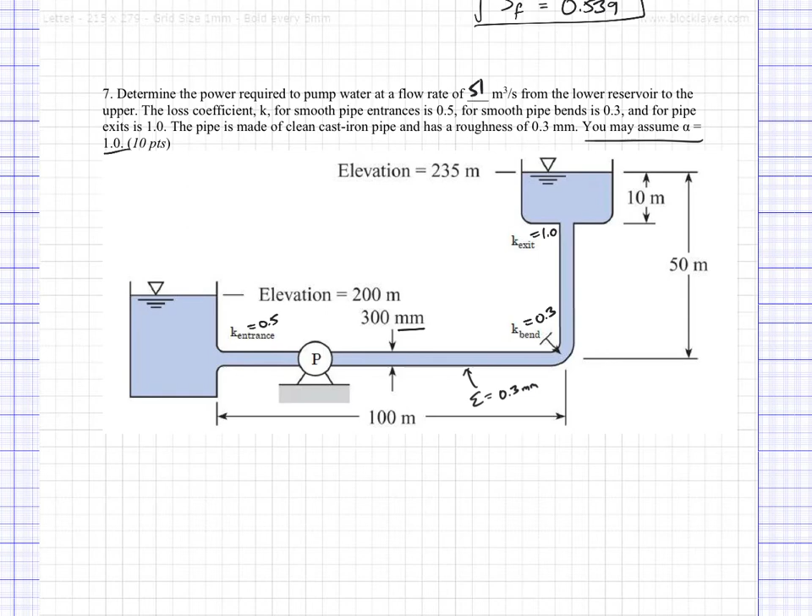So let's see here. What are we looking for? We're looking for the power required to pump water. So power equals gamma times HP times Q.

Then we know Q is given, and we know gamma because it's water. So what we want to know is HP equals what? The only way to get at HP is to do a nice little energy equation.

So we've got P1 on gamma plus Z1 plus alpha V1 squared on 2G plus head of the pump equals P2 on gamma plus Z2 plus alpha V2 squared on 2G plus HT - I don't see a turbine in this problem - plus the head loss. I'm going to expand the head loss into the head loss due to friction and the head loss due to the minor losses.

Since there's a bunch of these minor losses, we're going to put a little summation right there. Okay, so let's see what we've got here.

All right, so let's pick some locations. Usually in these cases, the easiest thing to do is to make this point 1 and this point 2, because we know in those locations that the pressures are atmospheric, in both of those locations.

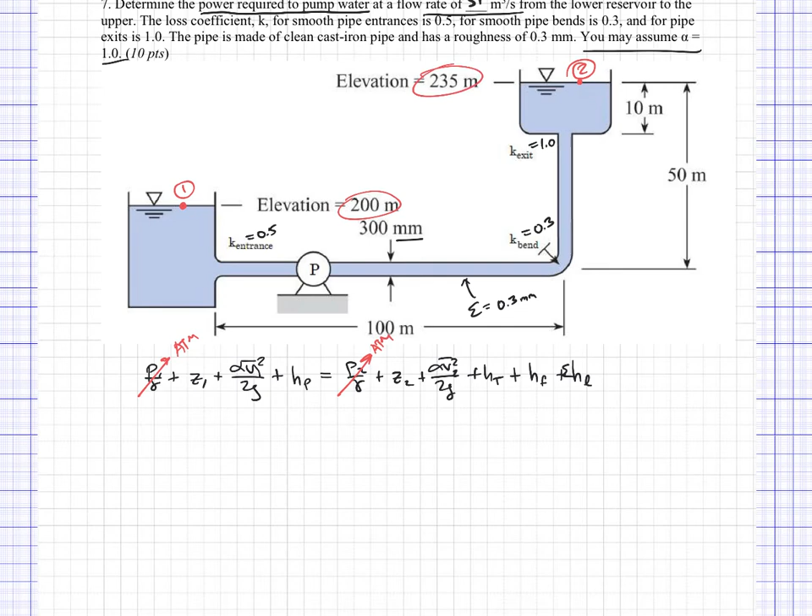Z1 and Z2, those are basically given as 200 and 235. So basically I'm going to make Z2 35 meters and Z1 my datum, because why not?

Okay, V1 and V2 - it's interesting. You may assume alpha equals 1.0, but you didn't need to, because it just goes away due to the Tahoe assumption.

Okay, let's see what's left. HP is left on the left-hand side, and that's what we're looking for ultimately. There is no turbine, and we have to deal with these loss terms.

So let's see. If we rewrite this, we get HP equals 35 meters. So basically the pump is going to have to raise this fluid by 35 meters while overcoming HF, which we generally at this point will write as F times L on D times V squared on 2G.

So that V squared refers to the velocity in this one pipe. We only have one pipe, so that's nice. And then plus the sum of K, the sum of HL, which is going to be the sum of K times V squared on 2G. Again, there's only one velocity in this whole thing, so I don't really need to label that V.

It's pretty straightforward. So the sum of K's - let's not get ahead of ourselves. So HP equals 35 meters plus F - unknown at this point, let me write F in blue because we're going to have to go looking for that - times L on D.

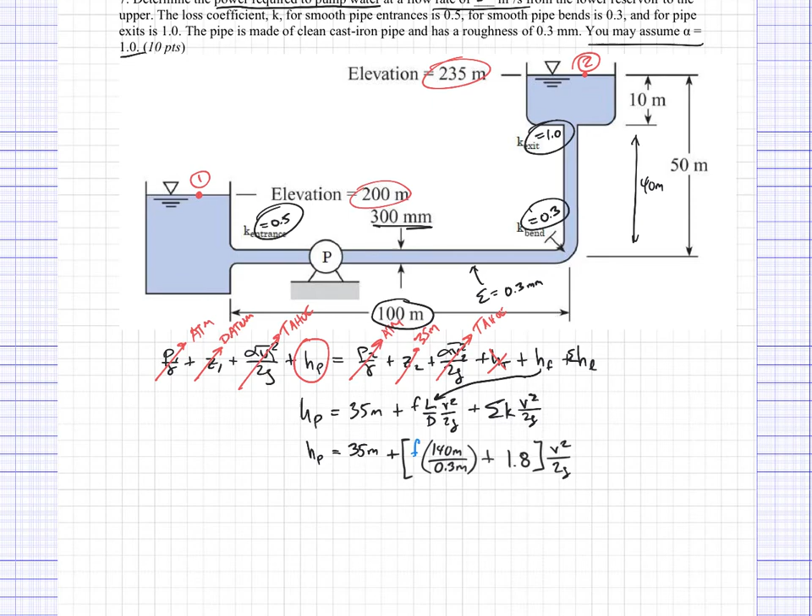Now this V squared on 2G - this problem is kind of interesting, or unusual in some ways, because it's pretty easy to get. We've got Q, and we know the diameter of the pipe, so I know what my V is pretty much everywhere.

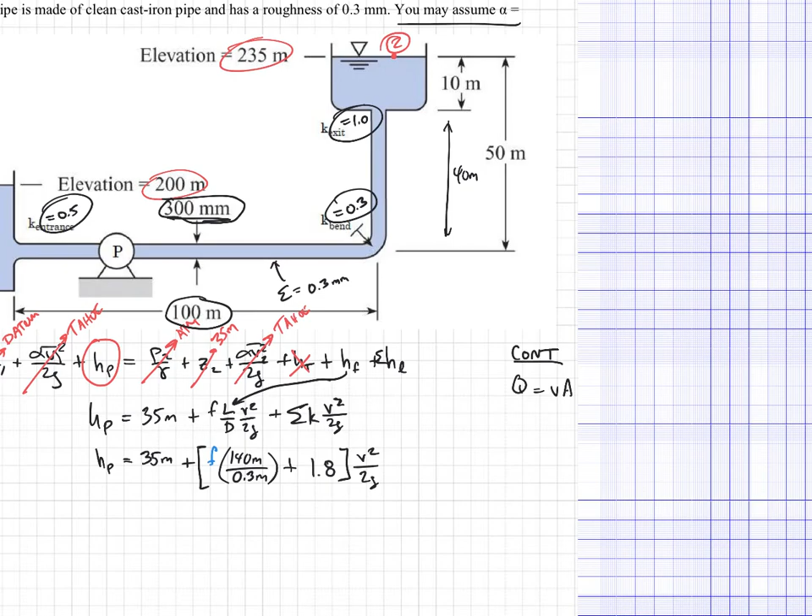If I just do a little aside, I need to do my continuity. So I've got Q equals V times A. What do we say - 51 cubic meters per second equals V times A, which is going to be pi times 0.3 meters squared over 4. So V equals...

This is 721.50 meters per second. That's such a huge number.

But I guess such is life.

From this, a lot of times I'll just go ahead and say, well, what is V squared on 2G? Because I've already got it in my calculator, right? So I can just take that number and square it, and then divide it by 2G, in this case is 19.62.

And I'll end up with a really massive number, 26,532 meters. I guess that's what happens when you get a velocity of something this huge.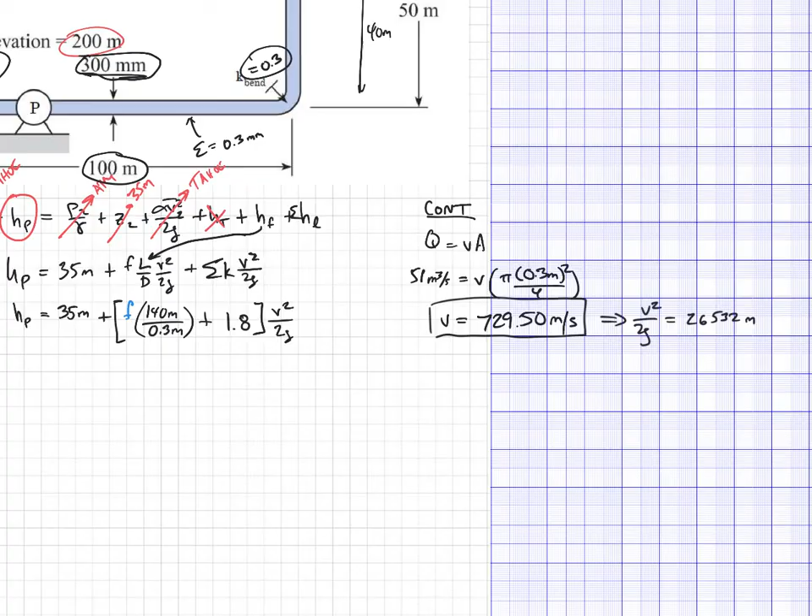And of course, what's the problem? Again, these flow rates are massive through fairly narrow pipes. I've got 51 cubic meters per second going through a pipe that's 30 centimeters in diameter.

For those of you who are not familiar, 30 centimeters is less than a foot. 51 cubic meters, a cubic meter is roughly 35 cubic feet, so you can kind of imagine.

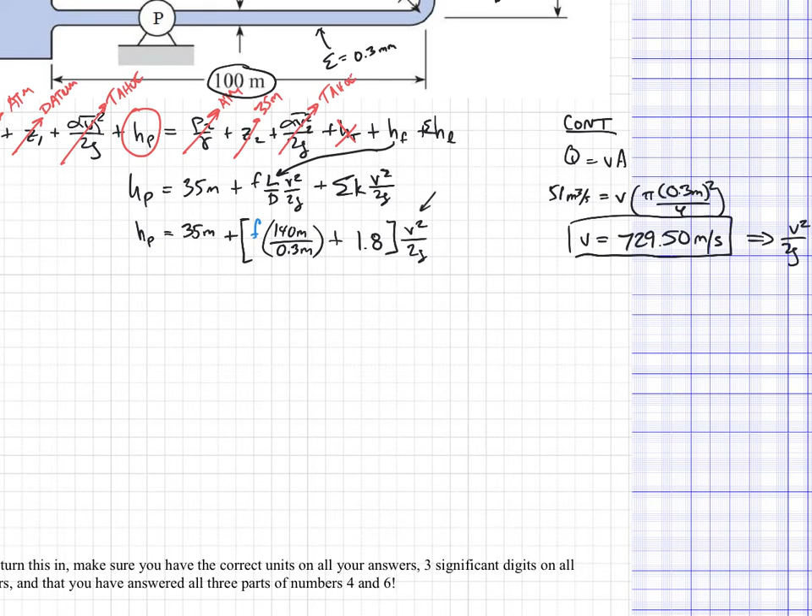Okay, so anyway, so now we've got all of that. So now we're looking at this and we're like, okay, so I can plug that in for V squared on 2G. I can go ahead and do that right now, right?

I can go, okay, let's erase this sucker, and let's just write down this rather ridiculously large number, 26,532 meters. Okay, so then the last thing I need to do is I need to get this F right here.

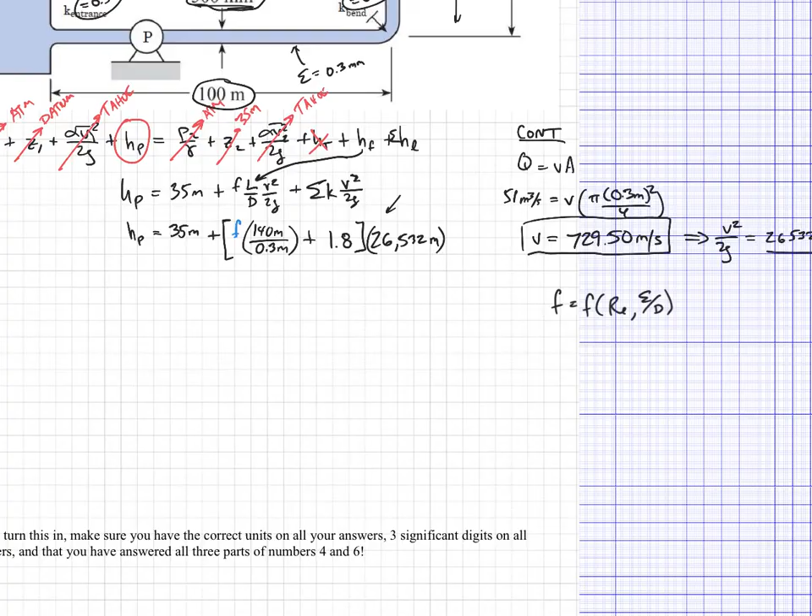Now remember, F is a function of the Reynolds number and the relative roughness. So we need to get both those things if we can, ideally, right? So let's see here, epsilon on D equals...

Well, the roughness was 0.3 millimeters, and the diameter was 300 millimeters.

So epsilon on D is 0.001. And I'm such a clown, I have to plug those in as millimeters, sorry, or I'm going to screw up the moving of the decimals.

Anyway, so there you go. And then the Reynolds number.

Okay, let's see. That's VD on nu. So the velocity is this massive number, 729.50 meters per second. The diameter was 0.3 meters.

And the viscosity, this is the whatchamacallit system, so the viscosity is, give or take, 10 to the minus 6 square meters, okay?

Square meters per second. So if we plug that into our calculator, we'll get the Reynolds number is, okay, hold on. Brief typo, this should be 721 and not 729. It's not going to really make a difference.

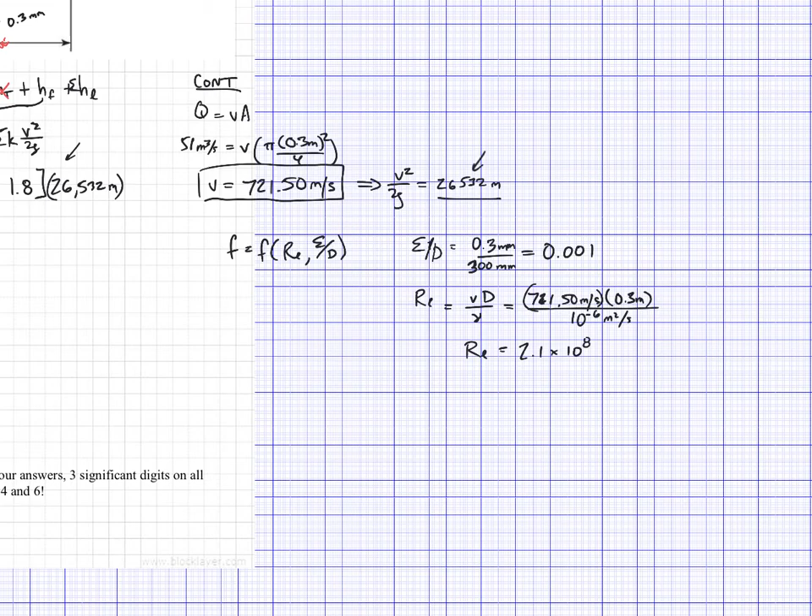Okay, but these are the two numbers that we're going to need for the Moody diagram. So let's give it a second, and I'm going to pull up a Moody diagram.

Okay, and the cool thing here, and we didn't really mention types on this particular problem — this might be the first exam I ever gave that didn't have a type 2 or a type 3.

But anyway, so we've got the Reynolds number, and we've got the relative roughness, which means we're not going to have to iterate. We're just going to go get our number. Okay, so we need 0.0001, which is right here.

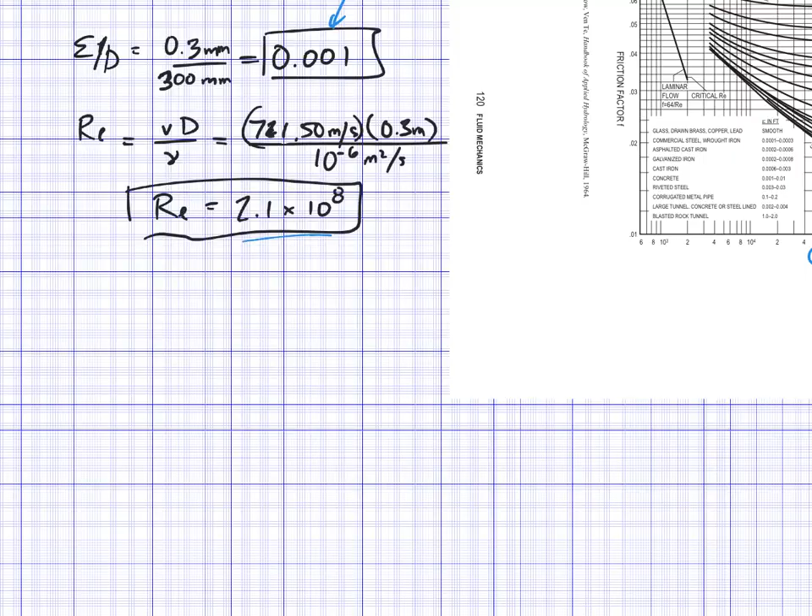Let's zoom in. Oh, that's too many zeros. It's right here. Okay, and then we've got 2.1 times 10 to the 8th. So we zoom in, 2.1 times 10 to the 8th. So we're off of this diagram. Here's 10 to the 8th. We're like right out here somewhere.

Okay, if I judge by this scale here, it's going to be, I guess, a little bit further out this way. But we're in the flat region, right? So that should be okay.

Okay, so this right here is our line. Okay, this line right here. And we're just going to follow it flat, right? Because we're technically out here somewhere, and we're in the region where the Reynolds number doesn't really matter, right? It doesn't matter if we go higher or lower.

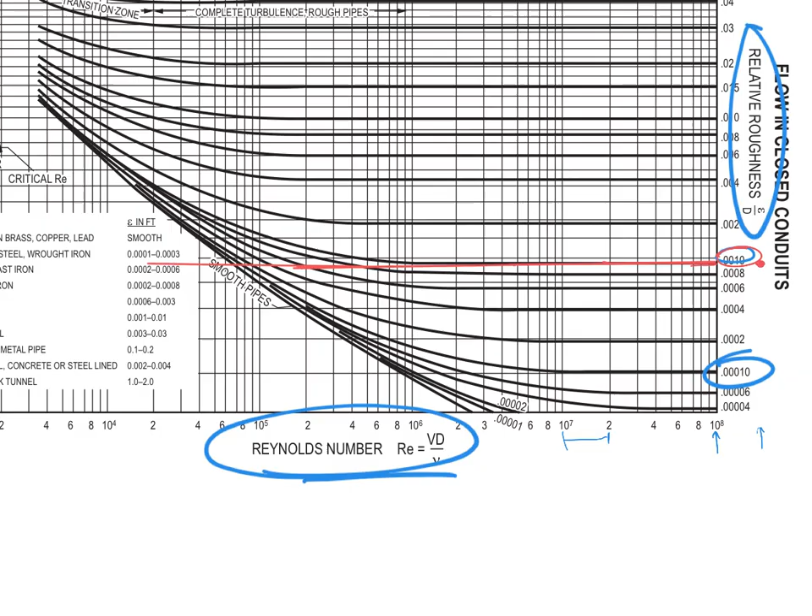I'm going to draw this as best I can, and you could probably see that I'm messing it up a little bit, but I'm doing the best that I can. And it's going to come in about like that.

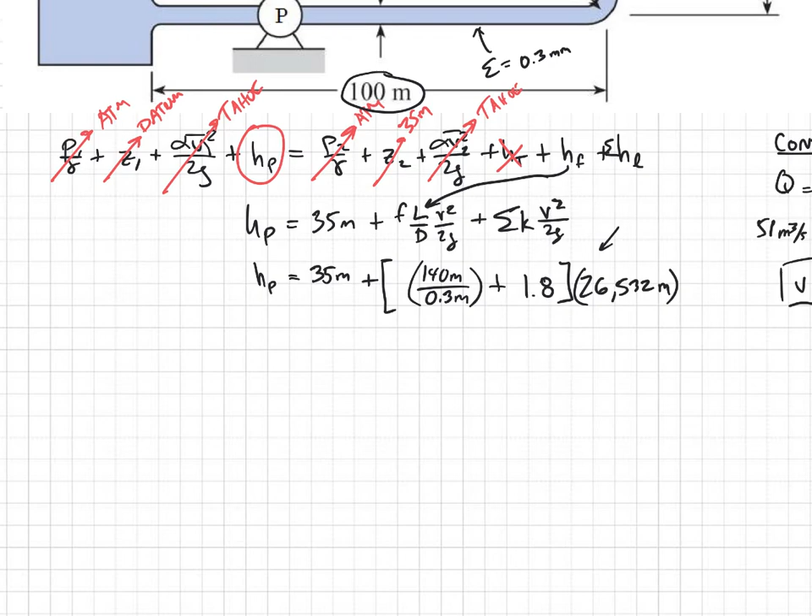Okay, so let's go over here. And we will plug that in where I see this F, right? So I'm going to go ahead and erase that F. And I don't know why everything got blurry. But anyway, so this is going to be 0.0195. Okay, that looks really, really ridiculous.

But whatever. So let's go ahead and let's solve this. And so I'll get HP equals. Okay, we get this absurdly high number.

Notice that raising at this elevation wasn't really a big deal. However, overcoming all the friction was a huge deal. Why? Because it was going so screamingly fast through the pipe. Again, this is essentially my error, or not my error. Well, it is my error, but it's what happens when you try to make an exam and everybody gets different numbers. So this is a bit of an unusual number, okay?

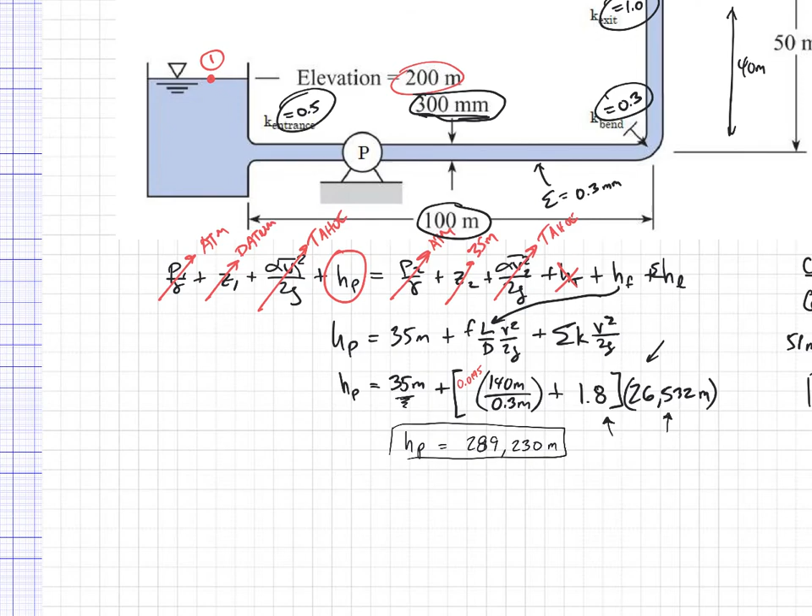But anyway, the ultimate question for this problem was, what is the power required to pump the water?

So the power then is going to be W dot equals gamma HP Q. So W dot equals gamma, which is 9810 newtons per meter cubed, times HP, which is 289,230 meters, times Q, which was 51 meters cubed per second. Okay, so these meter cubed are going to cancel.

I'm going to be left with a Newton meter. That's a joule. A joule per second is a watt. Okay, so we're going to take this number in my calculator. I'm going to multiply it by 51, multiply that number by 9810, and I'm left with some absurdly massive number, which is 1.4471 times 10 to the 11th watts.

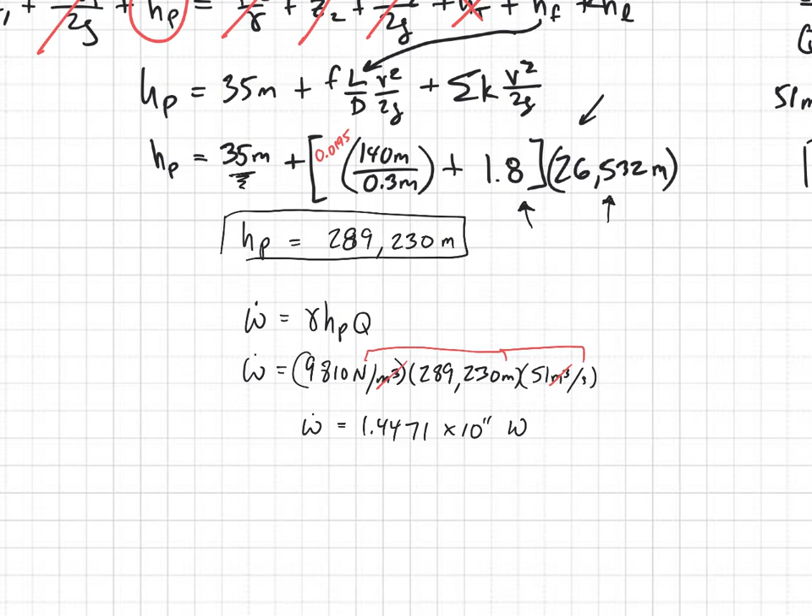Okay, usually we don't really like watts all that much. I would be inclined to make this to the 10th and then to the 9th. So we'd end up with W dot equals 145 times 10 to the 9th watts, or better yet, W dot equals 145, and these would be gigawatts. I never get to use gigawatts. Oh, the best I ever get is megawatts. But anyway, so there you go.

Okay, last thing here. Before you turn this in, make sure you have the correct numbers, correct units in all your answers, 3 significant digits, and you've answered all 3 parts of numbers 4 and 6.

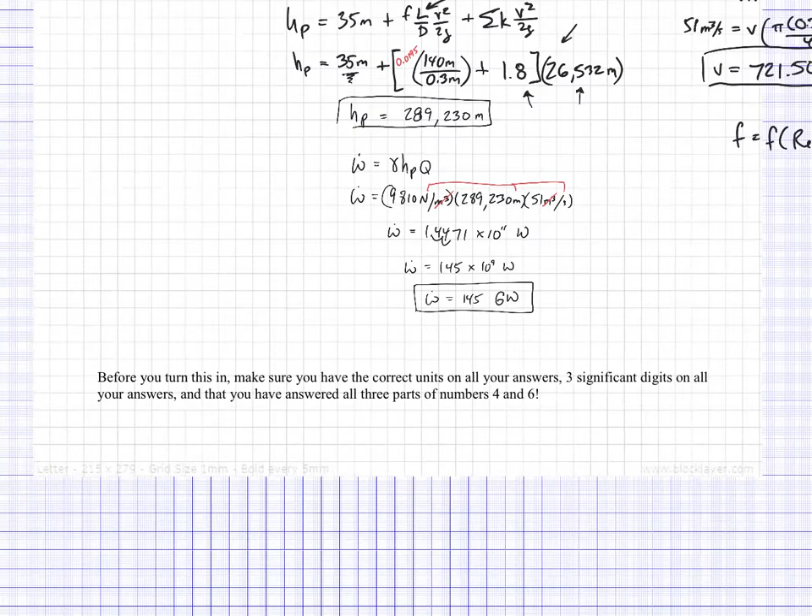3 sig figs here. Good. Units. 3 sig figs, should be no units there. I don't know if this is showing up blurry on your screen, but it's showing up blurry on my screen. But I definitely answered A and B.

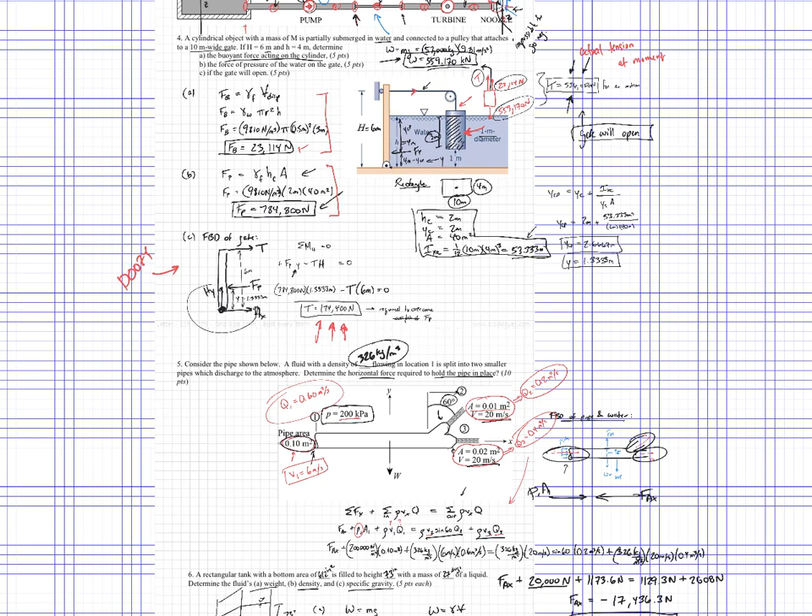Well, it's coming out blurry, so I'm just going to hope that I did that. I guess on this one the answer is gate will open, so there wasn't really a numerical answer. But for part B here, this FP should have been 785 kilonewtons if we want 3 sig figs. The FB should be 23.1 kilonewtons if I want 3 sig figs.

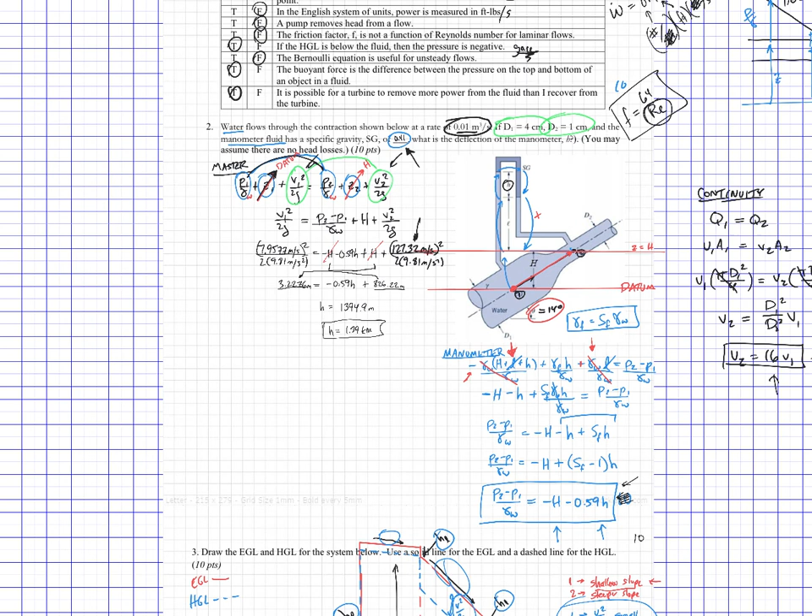And I guess I could convert this one, but it wasn't specifically asked for that number. Anyway, everything's coming out a little blurry at this point. This one has 3 sig figs and an answer. So maybe this video is going a little long. Anyway, so that's it. That's all I got, and that's the exam.